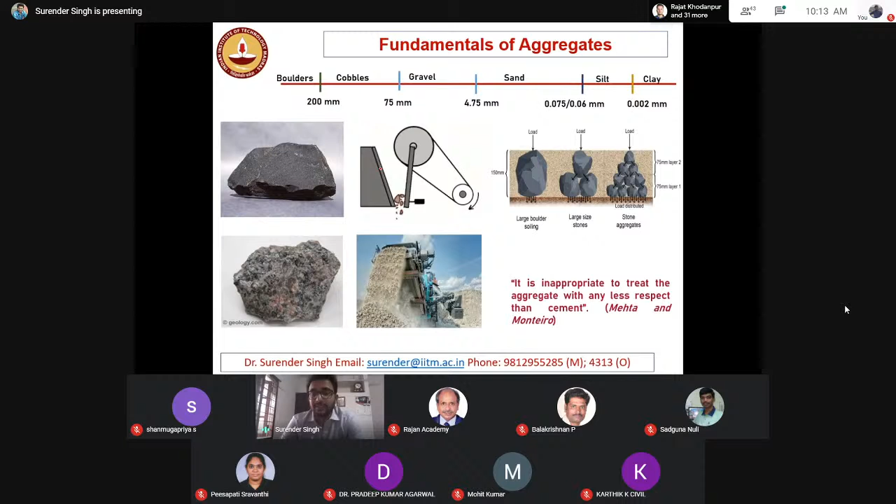In buildings we are using 60 to 80% of volume by aggregates. In pavements it can be much more, in fact around 90% also. Earlier we were getting aggregates for around 50 paisa, 60 paisa. But nowadays, because of the ban on quarrying activities, you can see in Chennai also that we are getting aggregates from far quarries, because there is a ban on quarrying activities.

We are not getting the coarse aggregate. And in fact, if I talk about the fine aggregates, they are very, very scarce now.

This increases the cost of the aggregates. So that's why we have to give equal respect to the aggregates. Also it will be affecting your pavement. Now it's monsoon in Chennai. When you are riding over the pavement and applying your brakes, it may lead to slipping or skidding, right? And mostly it is affected by the properties of the aggregates. Also the abrasion resistance is affected by the properties of the aggregates. And durability, because we are surrounded by the sea. If the aggregates are not durable, definitely your concrete structure will not be durable. So that's why I say we have to give equal respect to the aggregates as we are giving to cement.

So coming to the main part, that is fundamentals of aggregates. My way of teaching is little bit different. I'll be giving the challenges and then we'll be thinking, taking everything into practical aspect, not the theoretical aspect.

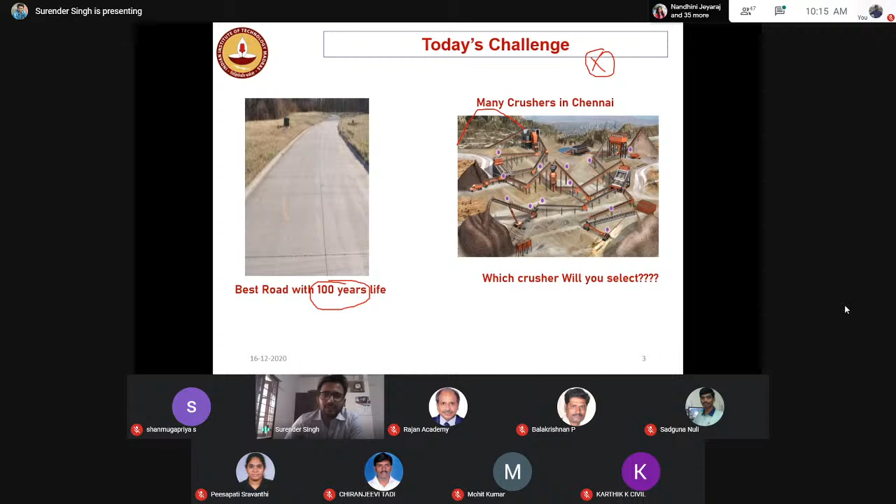So how do we select a quarry from which we can get good quality aggregates? Assume we have 5 quarrying plants in Chennai and one, say, in Cheyyar or Kanchipuram. Obviously we will not be taking the aggregates from Kanchipuram, right? Because transportation cost will be included and our pavement should also be economical.

So out of these 5 crushing plants - 1, 2, 3, 4, and 5 - which one do we need to select? Suppose Professor Rajan asks you: why don't you go to the crushing plant and characterize the aggregate, and tell me which aggregate will be beneficial for our concrete?

What will you do? Remember this picture in your mind and you have to go along with my presentation - you have to be involved in it. So the question is: which crusher do I have to select so that my pavement can stand for 100 years?

So obviously you will be going to the site, and Professor Rajan will be calling you: hey guys, what kind of aggregates are available there? What will you say? Before that we should know the classifications, fundamentals of classification.

Normally we can classify the aggregates into natural aggregates and artificial aggregates, which is a recent advancement. Earlier we know we have the igneous rock, sedimentary rock, and metamorphic rock. But in Chennai we are having igneous rock, mostly granite. In South India, most of the time we have granite aggregates. So you can call back and tell Professor Rajan: yeah, we are having igneous rock.

And nowadays we have artificial aggregates too - manufactured aggregate, recycled concrete aggregates, recycled asphalt aggregates, whatever - there are different types of aggregates. But then Professor Rajan will ask you: okay, now you told me there is a granite aggregate - which kind of granite aggregate? Can you classify it? As an engineer, how will you classify it?

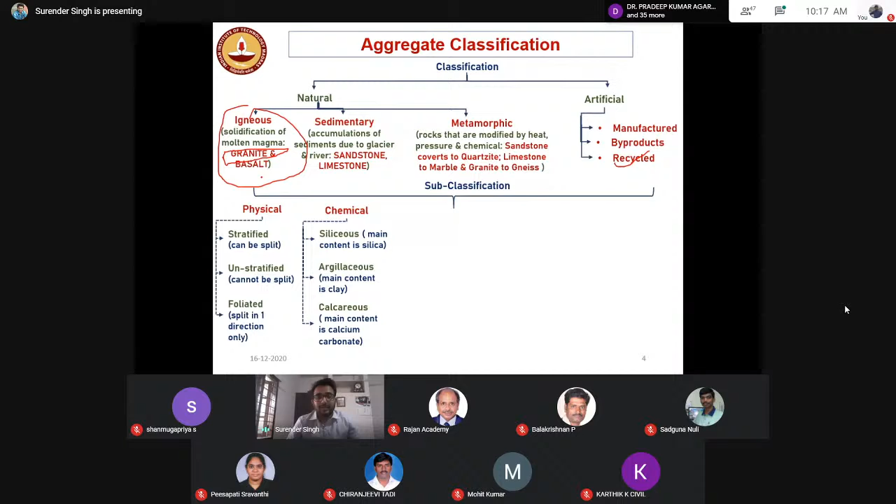We are classifying whether it's coarse aggregate or fine aggregate, but that's not the only criteria - there are many criteria. Based upon the physical properties, we can divide them, like when the aggregates can be split into two halves from one direction or both directions, we can classify. And then we can do some chemical characterization - we can say it is siliceous material, or made of clay, or sometimes you can get lime aggregate also. So we should know it.

And obviously, as a civil engineer, we always go with coarse aggregate or fine aggregate. But remember, coarse aggregate can further be divided into three parts based upon the size - cobble or boulders. Similarly, for fine aggregates, we can have the classifications there too.

In fact, we can have the silt, we can have the clay, right? Similarly, based upon the shape, we can further classify the aggregates into round aggregates, angular aggregates, subangular aggregates, flake and elongated aggregates. And also based upon the surface properties, you can feel the aggregates. You can see even if it is polished, you can say it's a polished aggregate.

Why are we reading about the classification? Because everything will be affecting the properties of the concrete. Let's say you are having a rough aggregate - obviously the bonding with the cement paste will be good. If you are having a polished aggregate, the bonding might not be good. But on the other hand, if you are getting a polished aggregate, the workability will be good, but not the properties. So what to do? How to decide? So before that, you should know the classification.

And the last classification is based upon where you are using it. For pavements, we are going with the normal weight concrete. The normal weight of the concrete is 2400 kg per meter cube. And if you are going for the big structures, heavy structures, you can get the heavy aggregates also. So in a nutshell, what I mean to say is that there could be many classifications that you should know.

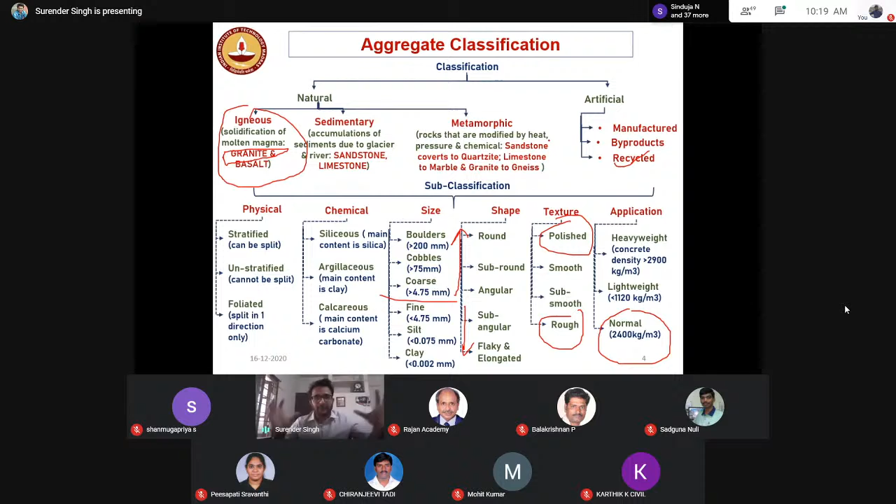Now the next question is, let's say you have decided 5 crushing plants. We saw it here, right? There are 5 crushing plants. Now your gang is going there, then you'll be going and collecting the aggregates for the characterization, right? So you might have done some test in your laboratory.

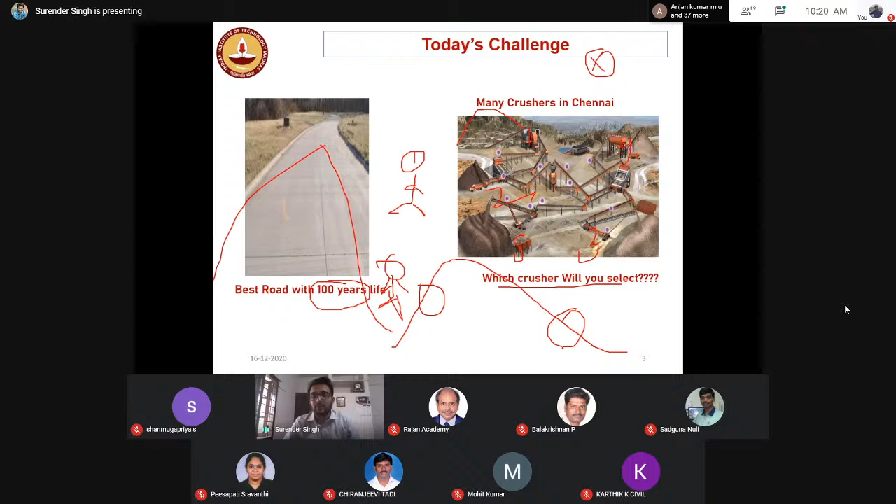What you are doing is taking 2 kg of the aggregate and then characterizing it, whether it's right or not. Because you can see here, there will be heaps - large heaps will be there in crushing plants. And you are taking the aggregates from here. And then can you say that the entire properties can be visualized with the help of a small sample? No. If you are taking the aggregates from here, one person will be saying this aggregate is good, but the person who is taking the aggregates from there will be saying no, the aggregates are not good.

So there is a sampling technique you should know. How to do the sampling? It depends upon the size of the aggregate. Normally we have 2 sizes - remember this, I have met with many students and they are always confused. There are 2 sizes: one is maximum size. Maximum size is the smallest sieve through which 100% of the aggregate will be passing.

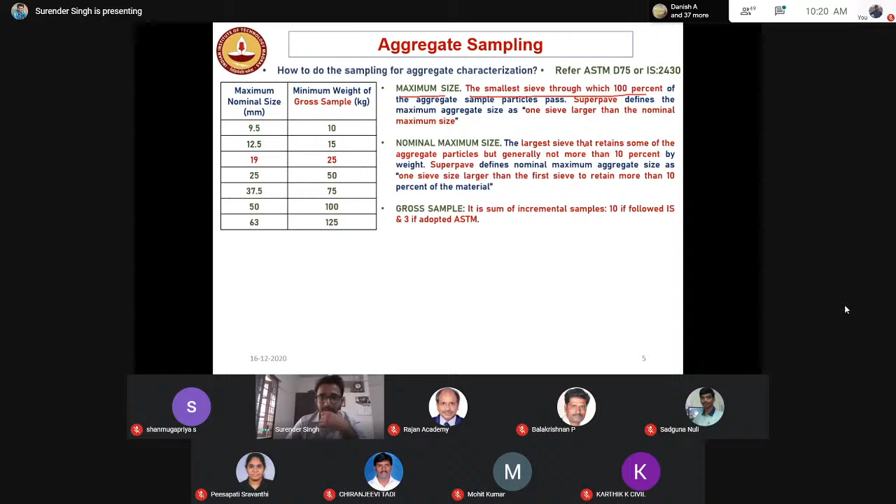And remember, there is a difference between the maximum size when you are collecting it for concrete pavement and for bituminous pavement. I'll be considering everything for concrete pavement. So it is the smallest sieve through which 100% of the aggregate will be passing. Let's say we have 37.5 size aggregate, 25 mm, 19 mm - you have to see from which size 100% of the aggregate will be passing. That will be the maximum size. And nominal size is the largest sieve on which around 10% of the aggregates will be retained.

So based upon that, we'll be deciding the nominal maximum size. And based upon the nominal maximum size, we have to decide how much of the aggregates we have to bring to the laboratory in order to characterize it. Let's say 19 mm aggregate, nominal size is there - so you will go to the crushing plant and see a heap, 19 mm size is there. So what you have to do is collect 25 kg of the aggregate. Remember, 25, not 2 kg - it's 25 kg.

Now the next question is from where you will be collecting the aggregates. You have to collect the aggregates from 10 different locations. Let's say this is the heap which is available - what you have to do is go with a board, a cardboard, and divide it into 3 parts: top third, mid, and bottom third. Then you have to place that cardboard inside the heap so that the upper aggregates will not be falling below.

So then collect the aggregates from here, similarly collect from here. Remember, you have to collect in 10 different increments. Place your cardboard here and then collect from here, collect from here, collect from here - how many? 6. Similarly 7, 8, and on the back side 9, 10, 11, 12, whatever - it should be minimum 10. And after that, what do you have to do?

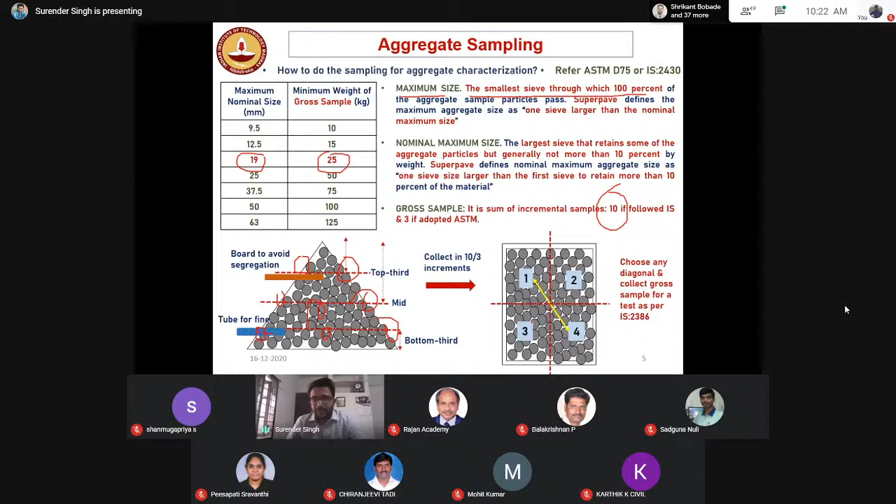You have to come to the lab and spread the aggregates in a container, then divide it into four parts and select any 2 diagonal quarters. Let me repeat: go to the site, collect 25 kg of aggregate when the nominal size is 19 mm, from 10 different locations, from top, third, mid and bottom. Then come to the lab, mix all the aggregates together, spread it, and divide into 4 quarters.

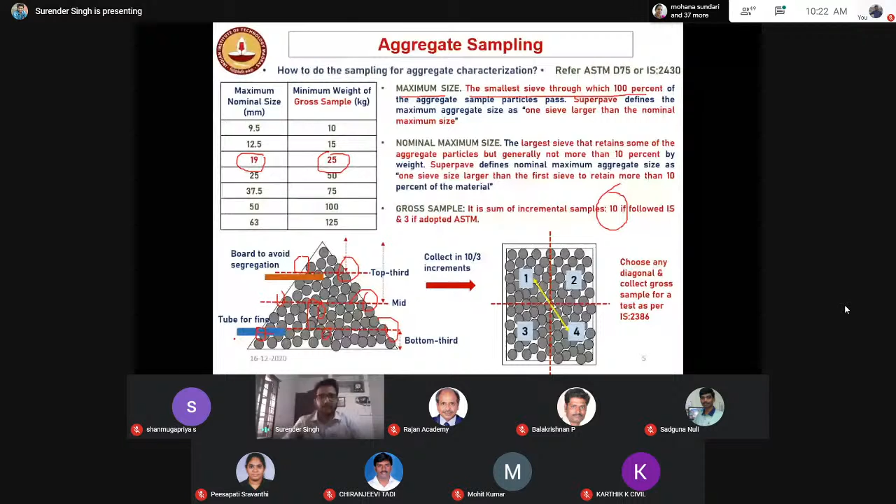Select any 2 diagonal quarters. If it is a fine aggregate, use a PVC pipe. Insert it and get the fine aggregates from different locations, then come to the lab and characterize your material.

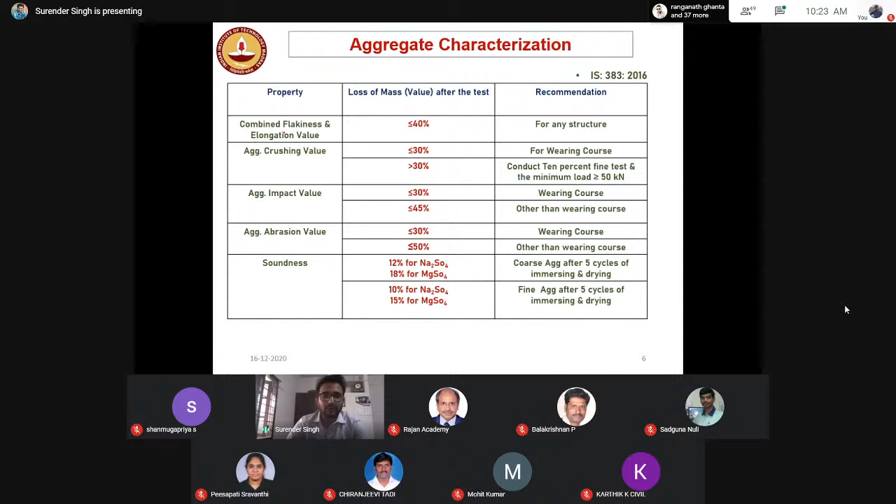For characterization, you will already be aware of the crushing value and impact value, so I will not be touching those. The last characterization I'll discuss is a recent one, which came about in the last 10 years.

You can see that the fraction passing 2 micrometer is clay, and we don't need clay for concrete. Although clay is used for cement manufacturing, when you are using aggregates for concrete production, it should not have clay, else it will affect the durability properties.

Nowadays, if you talk to some contractors, they'll mention crushed aggregate and uncrushed aggregate. Uncrushed aggregate means the gravels that you directly get from the sea or rivers, big boulders, without crushing them, just using them directly. In that case we call them uncrushed. If you crush it, it will be called crushed gravel. Partially crushed means a blending between crushed gravel and uncrushed gravel.

As far as the fine aggregate is concerned, when you're crushing the coarser aggregates, there will be some dust, and that dust is known as crushed stone sand or crushed gravel sand. If you mix it with natural sand, it will be named mixed sand. Nowadays we call it M sand. So M sand is nothing but the dust from the aggregates mixed with natural sand, known as mixed sand or M sand.

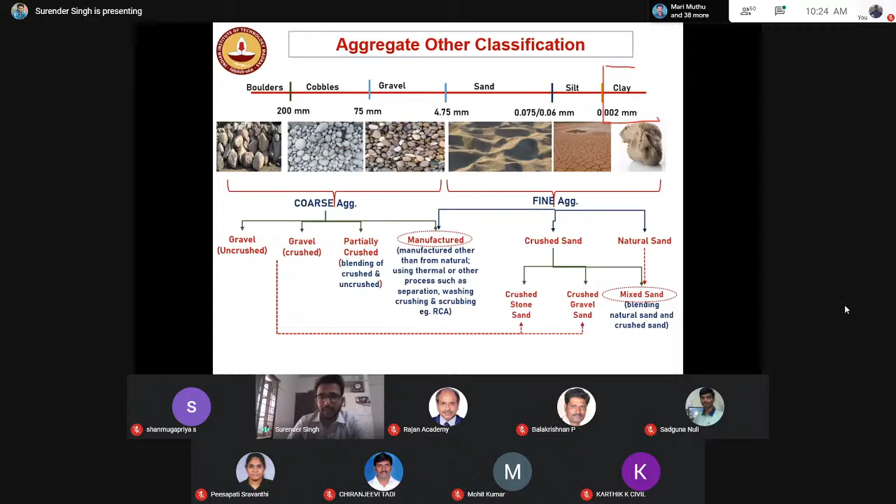Now, what happens when you go to the site? Professor Rajan asks you, what is the size of the aggregate? Normally it will be 20 mm, 40 mm, 63 mm, 16 mm, it can be various sizes. But remember, there are 2 gradations: one is single size aggregates, and the other is graded aggregates.

Let's take an example, say it's 20 mm. What do you mean by 20 mm? How do you know whether it is single size or graded? If you see single size, that doesn't mean all the aggregates are retained on 20 mm. This is a big confusion among students, that 20 mm means everything will be retained on 20 mm.

No. If I take 20 mm single size, you can see it passes completely from 40 mm, and it also passes from 20 mm, from 85% to 100%. That means only around 15% is retained. And on the 4.75 mm sieve also, it passes around 0 to 5%.

If I take the graded 20 mm aggregates, you can see it passes from 40 mm, may pass 20 mm, may pass 10 mm, and may pass 4.75 mm. So what is the difference? The difference is that this 20 mm graded aggregate has a significant amount of 10 mm aggregate also, and a significant amount of 4.75 mm aggregate also. Then why am I teaching this?

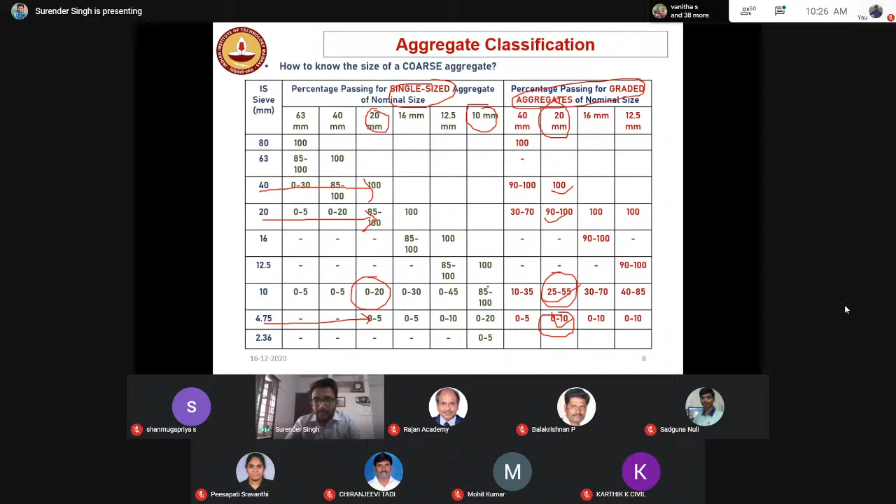Because in concrete we need graded aggregates. So if you go to the site and find 40 mm, 16 mm, 20 mm, 12.5 mm separately, you have to mix these aggregates to make a single graded aggregate size. When you go to the site and they say we are using 10 mm and 20 mm, that means most of the time it can be single size aggregate, and single size aggregate doesn't mean it is retained on 10 mm — it will be passing through 10 mm also.

As far as fine aggregates are concerned, if you go to the market or the crushing plants, you'll see there are different zones: zone 1, zone 2, zone 3, zone 4 fine aggregates. As per IS 383 specifications, you can classify which variety of sand is available.

Remember one thing here. In these respective codes, you will be seeing different kinds of fine aggregates. And when you are going to the site, there will be deviation. Not all the fine aggregates that you will be getting will be having its limits between specified limits. There will be marginal deviation. In that case, what to do?

The code, that is IS 383, we have recently revised it, allows you to do little bit things. But deviation should not be there in the 600 micrometer sieve. So if you find any fine aggregate and there is a 5% deviation in other sieves, you can go through it. You can say yeah, this is zone 1.

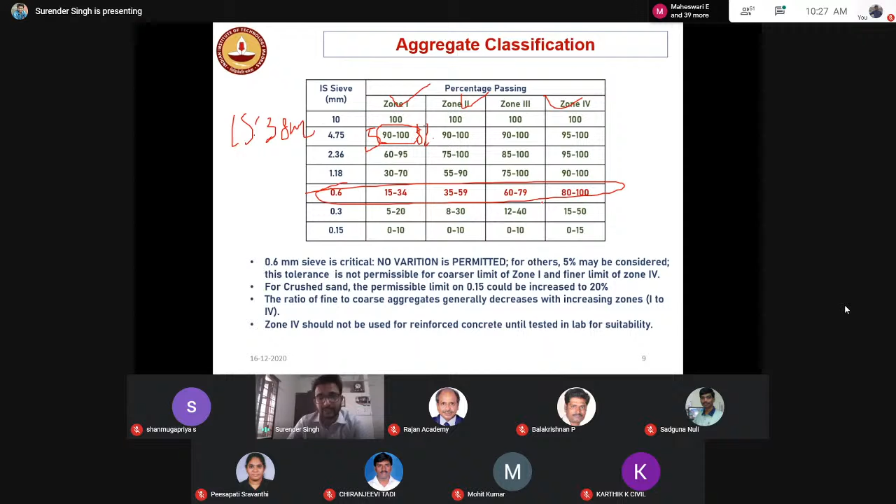So we have different characterization things. You might have seen in your college also, now because of the pandemic situation, everything is closed. But I assume that most of the students did the transportation laboratory. So we have to characterize the aggregate for specific gravity, density, toughness, strength, abrasion resistance, polishing value, elongation and flakiness value, and the durability aspects.

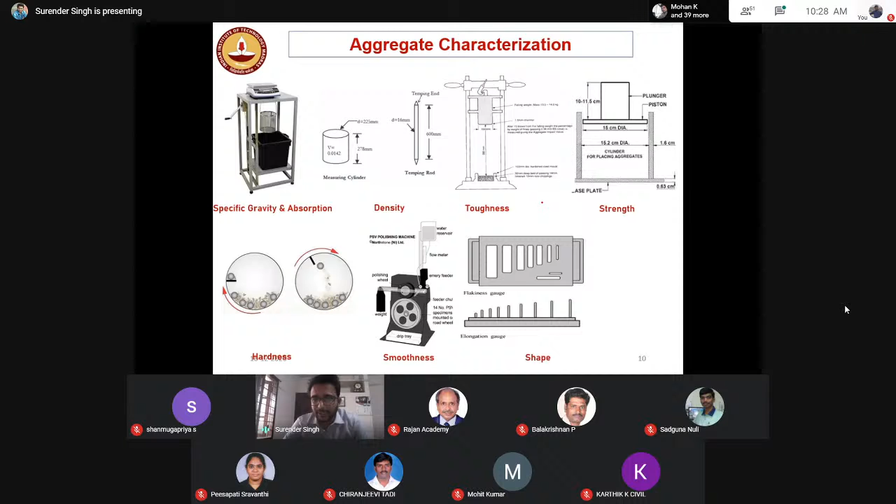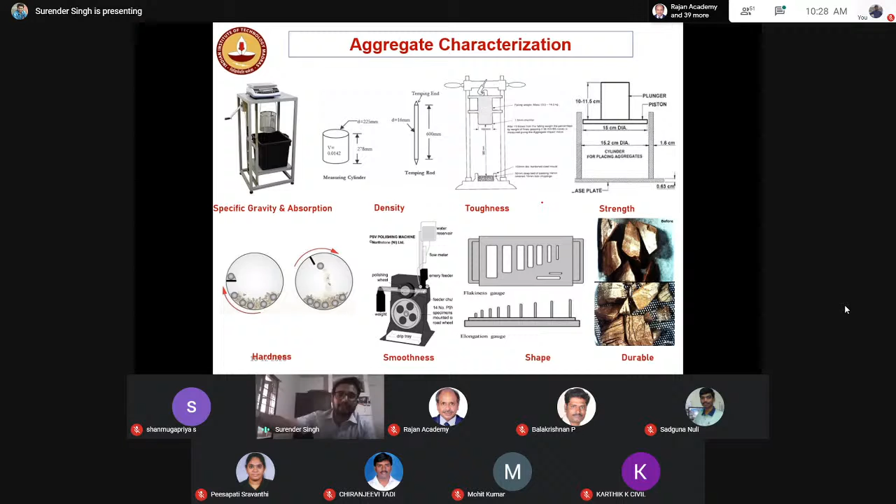And based upon all these properties, then you have to decide which crushing plant you have to select. The aggregate whose specific gravity is good, whose water absorption is lesser, whose density is more, whose toughness is more, strength is more, hardness will be more, then you can say yes, out of these 5 crushing plants, I'll be selecting this crushing plant. And then you can come to your professor and say, sir, out of these 5 crushing plants, we are selecting this one because the properties are good. What properties? What we have discussed.

And then remember, for pavement application, we have given different specifications. You can go through IS 2386 guidelines, and you can see whenever you want to use it for building or pavement application, the water absorption of the aggregate should be less than 2%, impact value should be less than 30%, crushing value should be less than 30%, abrasion should be 30%.

So based upon these properties, let's say what happened, 2 of the crushers were giving good properties. Now which crusher do you need to select? Then it will be depending upon the economy, how far it is from our site. In today's example, our site is connecting JAIN college to IIT Madras. Whichever crusher plant is very near, we have to select that.

Now you will be discussing, see, my mountain is same, from the same mountain they are crushing the aggregates, giving me 20 mm and 10 mm. This crusher plant also, and similarly this crusher plant also, is using the same mountain for producing 20 mm and 10 mm. So why are the aggregate properties changing? You must be thinking it, right?

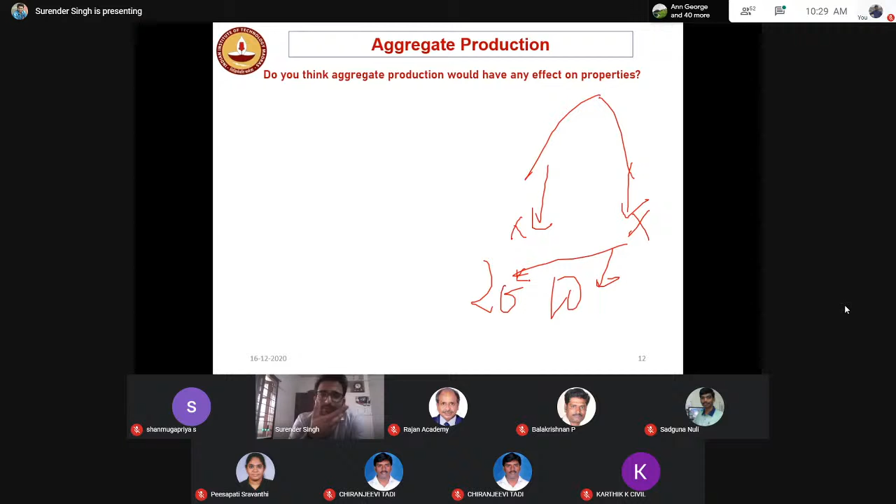Yes, because the aggregate production is having a significant effect. Normally what happens, you will go to the mountain, you will demolish the mountain, right? You will be getting big boulders. Then you will be bringing those big boulders, or maybe you are crushing the big boulders at the site also. And then you will bring it to your crushing plant, and you will be again crushing it.

So you can have various crushing mechanisms: primary crushing, secondary crushing, tertiary crushing, or quaternary crushing, in which you are reducing the size. Let's say this was 100 mm, you keep on crushing it, and you got an aggregate of 4.75 mm. So now do you think that the crushing will be having an effect on the properties of the concrete?

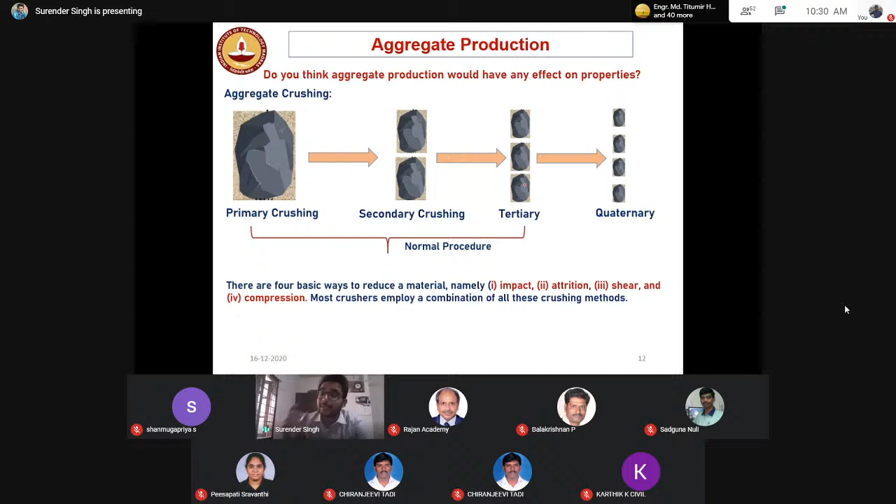So normally we are having 3 mechanisms. We'll be crushing first, then again crushing it, and again crushing it. And the crushers that you are using will be having some effect. So at the site, we have different crushers: a jaw crusher, a cone crusher, and an impact crusher. So all these crushers we are using in order to produce aggregates, and there is a significant effect also.

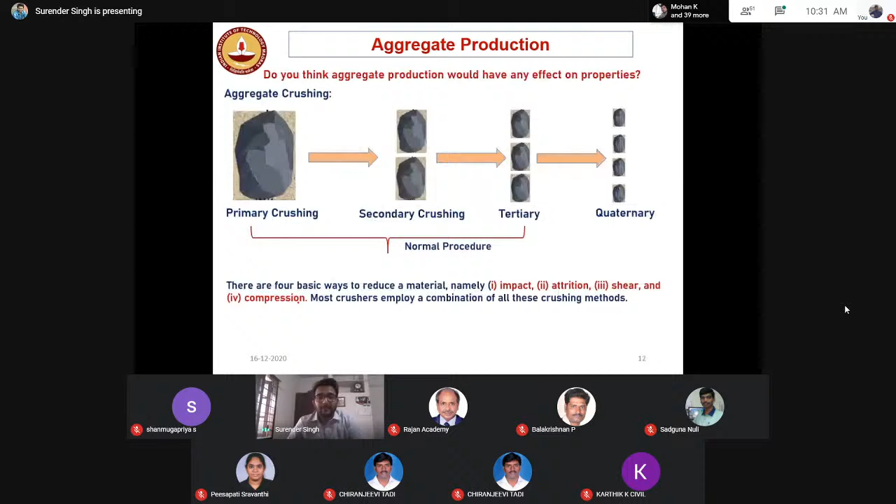Earlier we were not thinking about this, we were thinking okay, we are just crushing the aggregates, right? But now the mechanism, the principle that you are applying to crush the aggregates will be having a significant effect on the properties of the aggregates. We have many studies, and what we found is that by changing the sequence, let's say you are having first jaw crusher, then impact crusher, then cone crusher, or you can have first jaw crusher, cone crusher, and impact crusher.

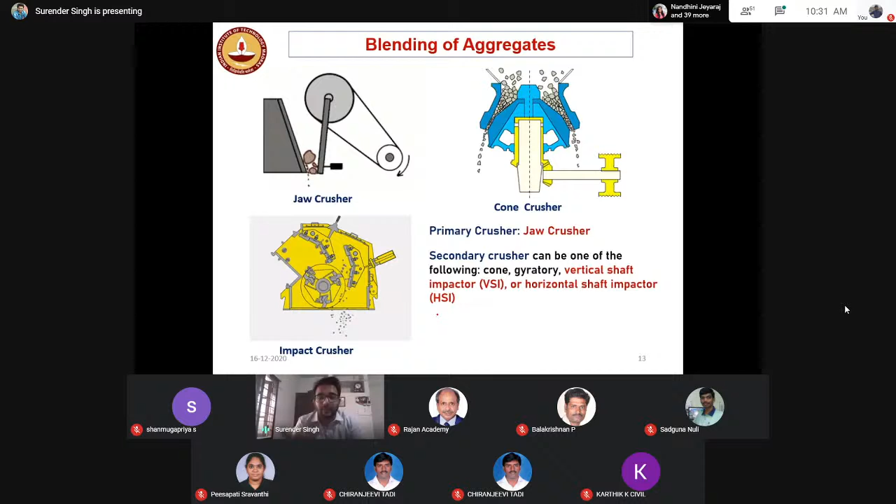Impact crusher can be of different varieties. By changing the mechanisms, you can get different aggregate properties, which will be beneficial. As a researcher, what you have to do is crush the aggregate with different mechanisms and see which aggregate gives you good properties. If you want to do some research, your master's or PhD, or even a good BTech project, you can take this one. You can go to the crushing plants, see what mechanisms they are using, document it, bring the aggregates, do the characterization, make concrete, find the strength, and you will see there is a difference.

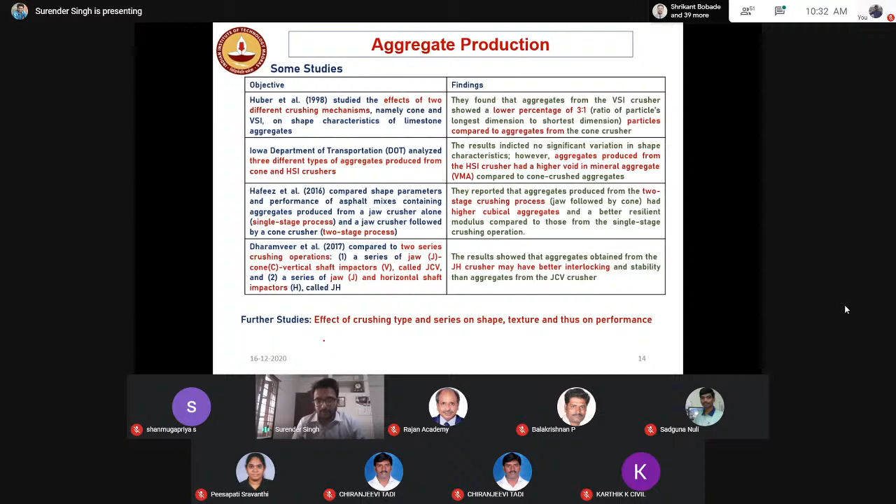Now the next question is, you must be thinking, for buildings you're always using 20 mm and 10 mm aggregates, right? And for the pavements, you are using 31.5 mm size aggregate. Why is there a difference?

The difference is that in our pavements we have different layers. We have the wearing course, we have the base course, we have the drainage layer which we can call the granular sub-base course, and we have the subgrade.

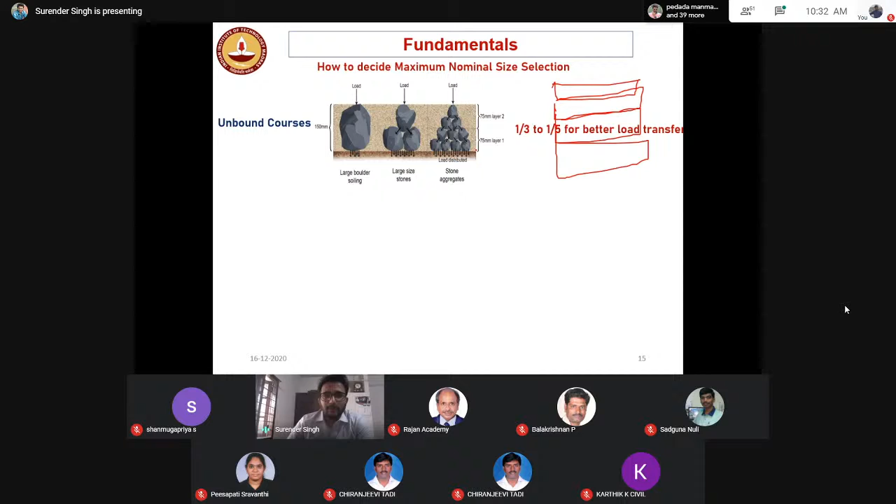So how to decide what should be the size of the aggregate? You know the formula, stress equals load upon area, right? Which shows that if you increase the area, the stresses will be reducing. So how to increase the area? Let's take an example. Let's say you are taking one aggregate of 150 mm size, applying the load. You can see here the area of load application is this, and the same area is there. So the stresses occurring at the top, the stresses at the bottom will also be the same.

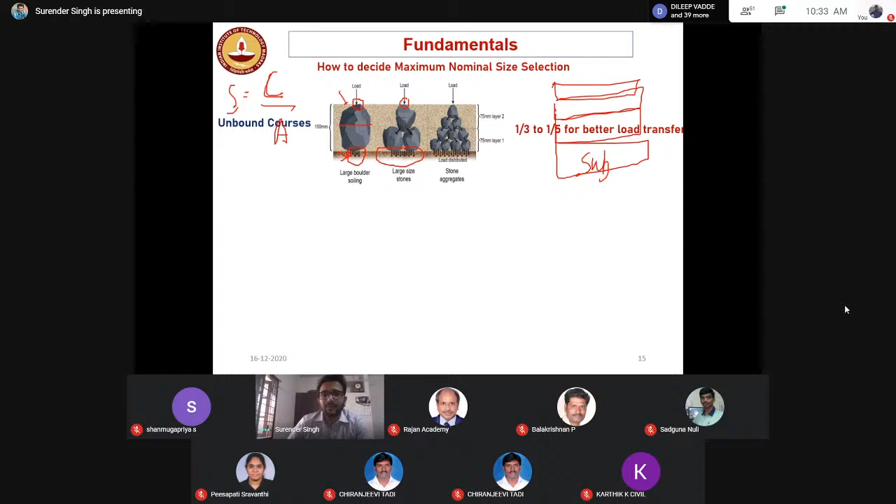And we know in subgrade what we are using is soil, mostly soil, and it is the weakest link in a pavement system. You have to protect the subgrade. So in the next step, what we can do, we can crush this aggregate into 3 aggregates. Now what will happen if you apply the loading at this area, but the load distribution will be there from a bigger area? That means the stresses will be reducing. Similarly, if you further crush this aggregate into small pieces, the area will further increase, and if the area is increasing, the stresses on the subgrade, which is the weakest link, are reducing.

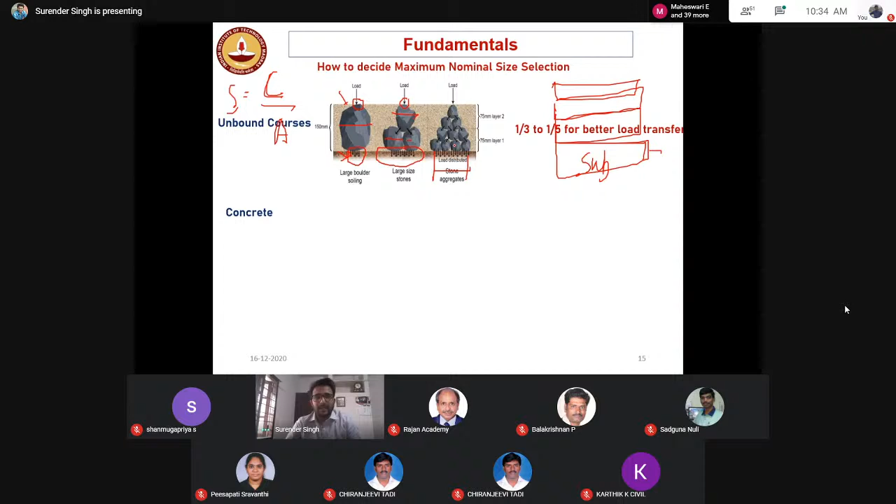So in a nutshell, as a thumb rule, how to decide the aggregate size: you know your subgrade will be around 500 mm, so 500 divided by 3 or divided by 5, this should be your aggregate size for aggregate-to-aggregate transfer. In case of concrete, generally there is a mixed feeling, there are 2 schools of thought.

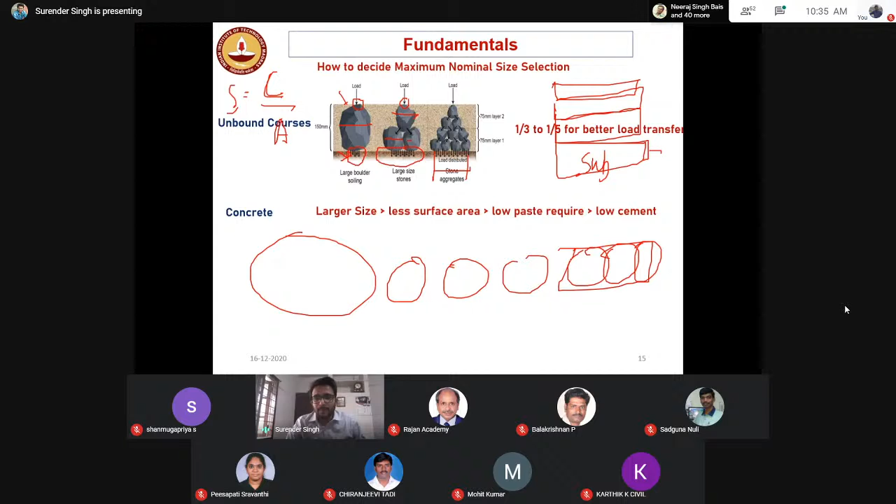One says that if you have a bigger aggregate, the surface area will be lesser, and if you crush the aggregate into pieces, the surface area will be higher. If the surface area is higher, you will be needing more cement, and cement is the most expensive portion. So my thing is, I have to construct one pavement that will last 100 years, but it should be economical also. So what I'm doing, I'll be using a bigger size aggregate so that the surface area will be lesser, and if the surface area is lesser, when I make the pavement, I'll be needing lesser cement to bind the aggregates, and it becomes economical.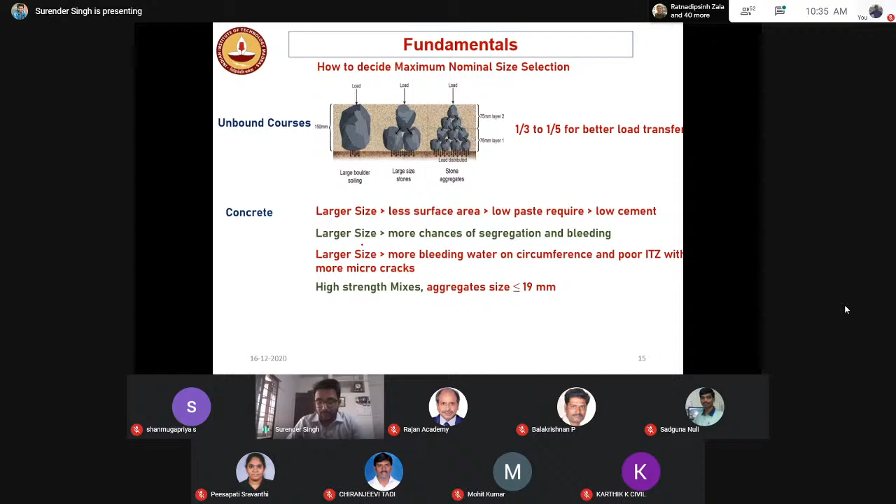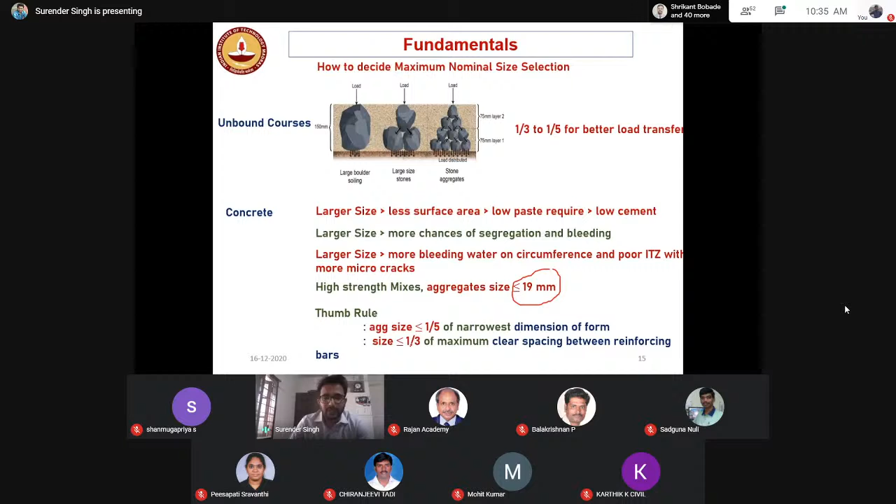However, there is another school of thought also. It says that if you have large size aggregate, then mixing will be a problem. If you have large size, your properties will be lesser because aggregate-to-aggregate interlocking will not be there. So we say that if you want to make very good concrete, don't increase the size beyond 19 mm. If you're going with normal concrete, you can use the same formula: the maximum size of the aggregate should be 1/5 of the total thickness of the pavement. So if your slab is 300 mm, divided by 5, you get 60. So the size of the aggregate should not be more than 60. This way you can get the strength as well as good mixing.

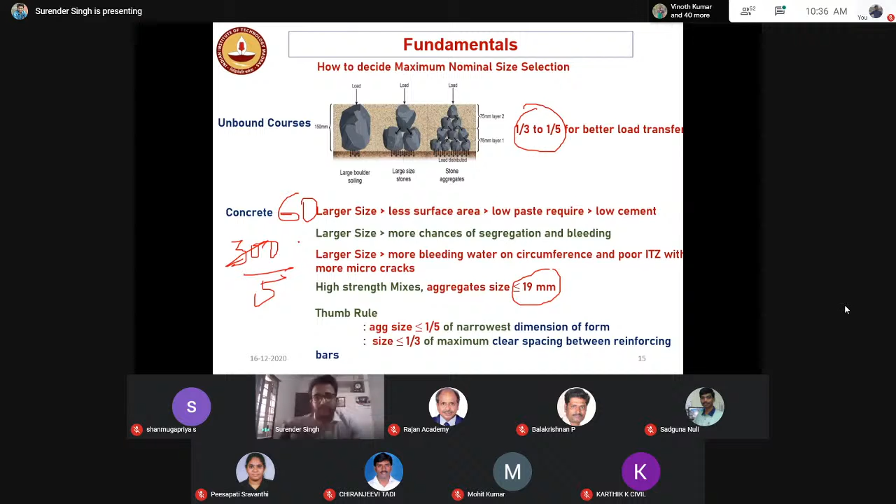So now the question is, why do we have to mix 2 aggregates together.

If you remember from slide 4 or 5, we told you that when you go to the crusher plant, you will be getting different heaps: 20 mm aggregate heap, 16 mm heap, 12.5 mm heap. We have to club everything together to make a graded aggregate.

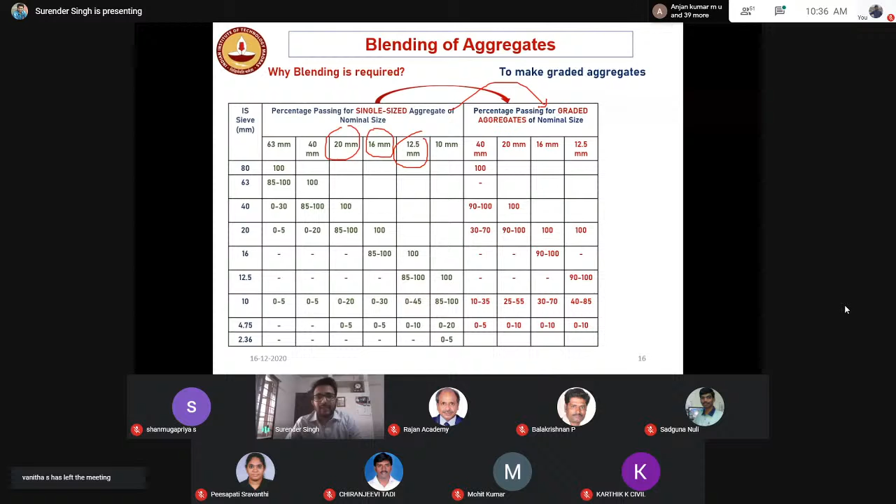Similarly, if I talk about concrete pavements, we have different layers: embankment, subgrade, GSB, DLC, and the slab. If you read the Indian Roads Congress specification, it says the aggregates we use should be a combination of 26.5 mm, 4.75 mm, 300 micrometer, and 75 micrometer.

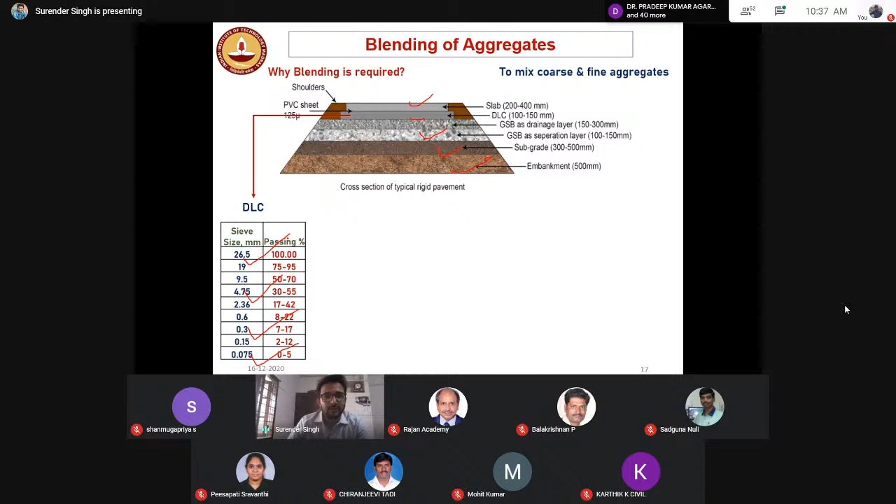Remember, there are two reasons: one, you have to mix different coarse aggregates together to make a graded aggregate, and then mix fine aggregates along with the coarse aggregate to achieve the gradation specified within the stipulated limits of MORTH or Indian Roads Congress. For different layers we have different gradations.

Then the question is, why do we have to grade the aggregates? Let's take an example. Take 26.5 mm aggregate, or any size, and fill a container, completely packed. Then pour some water - let's say 100 ml of water was required to fill these voids.

Then you add 9.5 mm aggregate into this mixture. This smaller aggregate will fill the voids. So if the voids are filled by smaller size aggregate, you will need a lesser quantity of water to fill those voids. Then do one more thing.

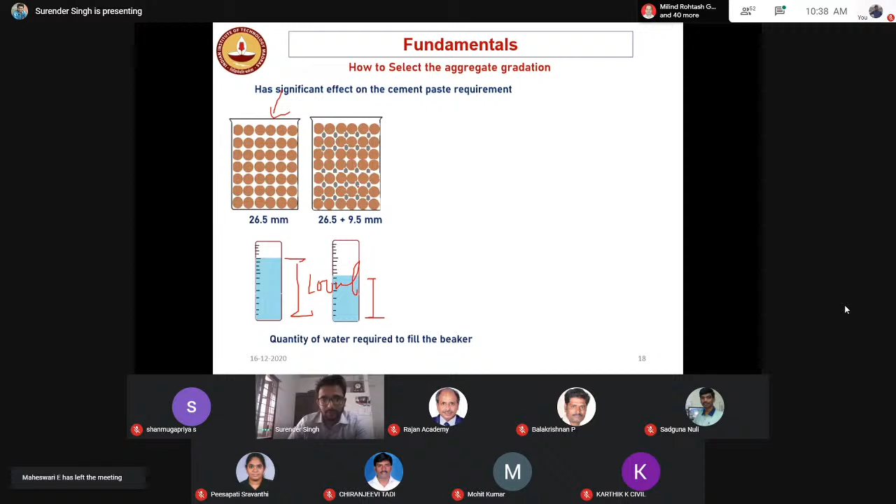You add 4.75 mm aggregate to it. So the big size aggregates were there, having some voids; those voids were filled by smaller size aggregate, and that smaller aggregate also had voids which were filled by 4.75 mm aggregate. Thus you need significantly lesser amount of water to fill these voids.

One second, some noise is coming. Yeah, sorry for the interruption.

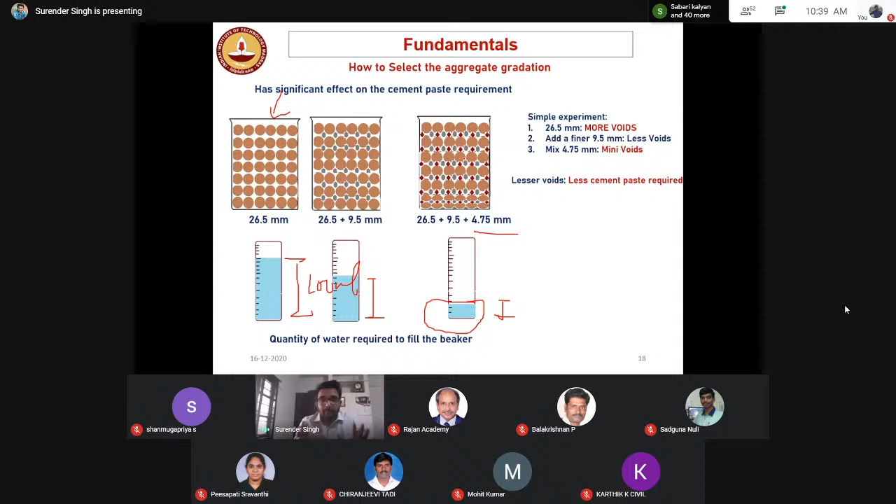So what we need to see is that if the amount of voids is lesser, that means lesser cement is required, and if lesser cement is required, your concrete will be better and economical. Generally we have seen that if you mix coarse and fine aggregate in a proportion of 60 and 40%, your voids will be least. You can take this as a thumb rule, but it's not always the same.

When you ask an engineer, they will say 60% coarse aggregate and 40% fine aggregate. But it's not always the same - it can be 35-65%, or 50-50 also. So you have to find the proportion so that the voids will be minimum.

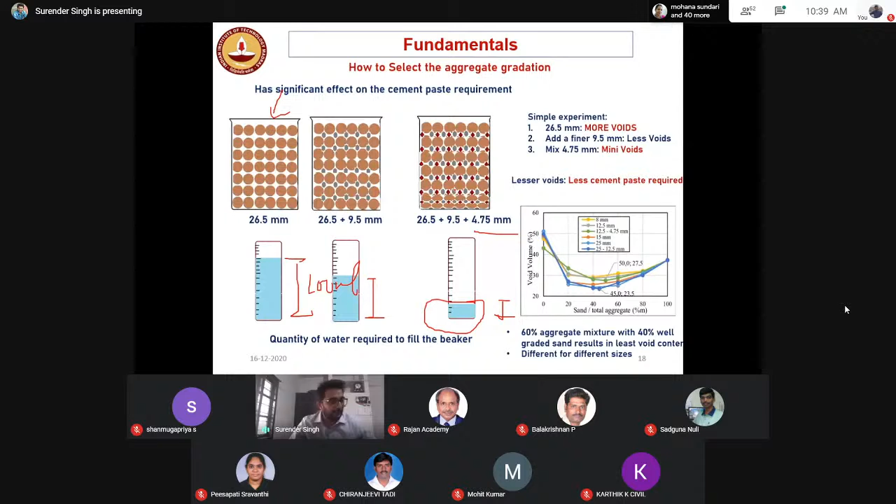So, why, when we are mixing the aggregates... I hope you can hear me, right? Professor Rajan, can you hear me? Sir, we can hear you. Yeah, thank you. Sir, very much audible, please continue. Okay, thank you very much.

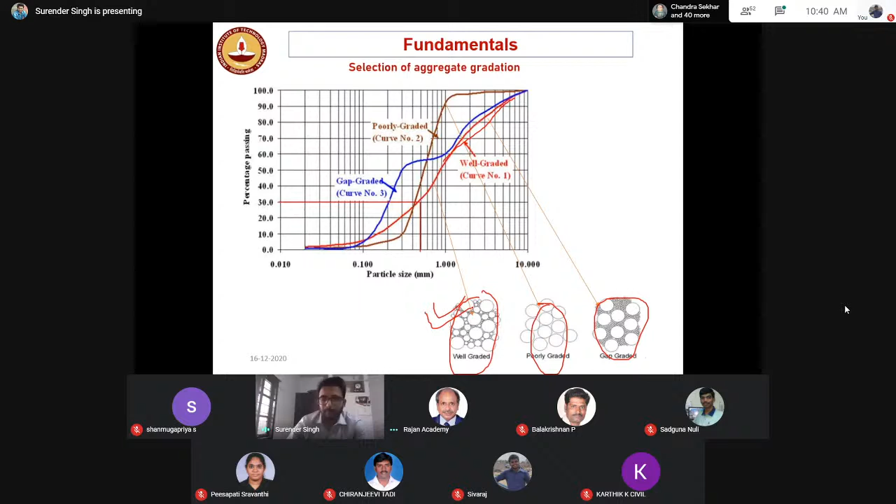So when we are mixing the aggregates, we can have different gradations: well-graded aggregates, poorly graded aggregates, gap-graded aggregates. What we always need is well-graded aggregates, because if you have well-graded aggregates, there will be lesser voids and the cement requirement will be lesser.

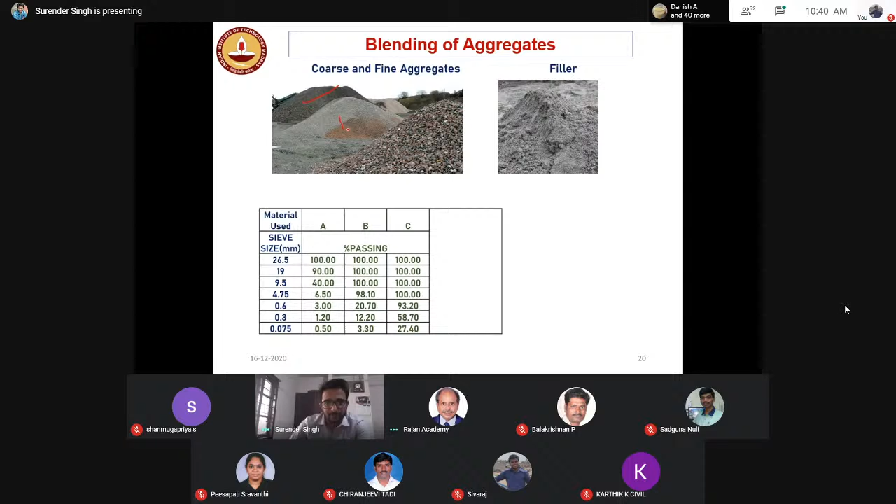Let's take an example. Suppose Professor Rajan sent you to the site, you will see different heaps. This is a picture I took from a crushing plant in Chennai - we can see 20 mm aggregate, 10 mm aggregate, 40 mm aggregate, and filler material. How do we mix all these aggregates together? This is the question.

Let's say we have three aggregates: 20 mm, 10 mm, and some fine aggregates. How to mix them together? You have to open your IRC, Indian Roads Congress specification, and it will specify the limits - for example, from the 75 micrometer sieve, 5 to 10% of the material should be passing.

Okay, how to mix these aggregates to fall within the limits? This is the question, so we have different methods. I'll be teaching you all the methods because you are civil engineers, and you will be going to the site where your boss will ask you to blend these aggregates together. You'll be thinking how to blend them. The simple way is the hit and trial method.

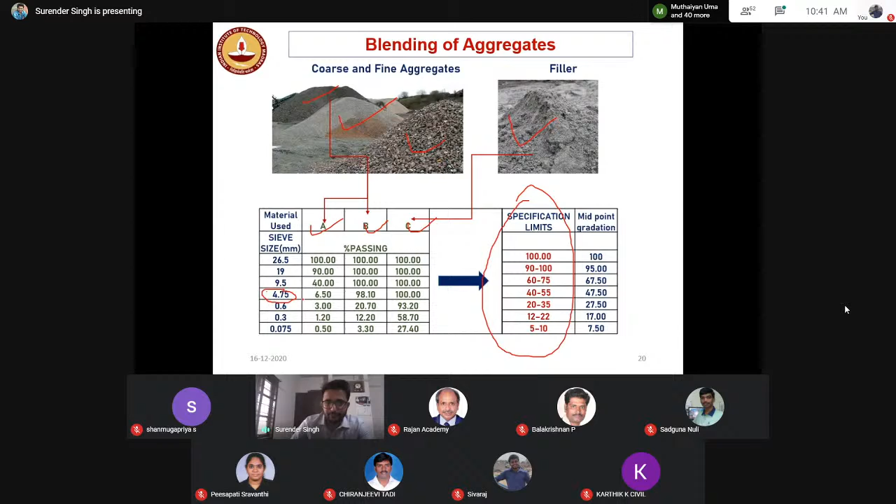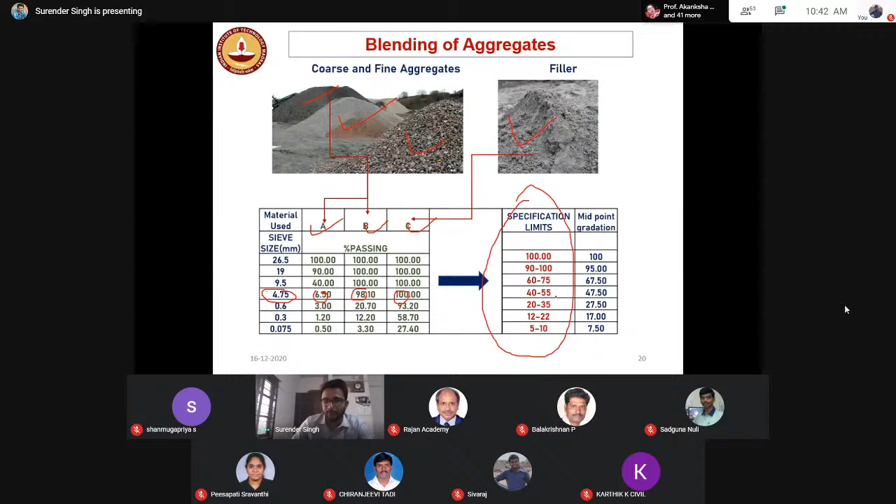Let's say this is the specification. I'm taking only one sieve, 4.75mm. Material A, 6% is passing; material B, 100% is passing; material C, again 100% is passing. Your specification says that when you mix the three aggregates together, 40 to 55% of the aggregate should be passing. Then how to do it?

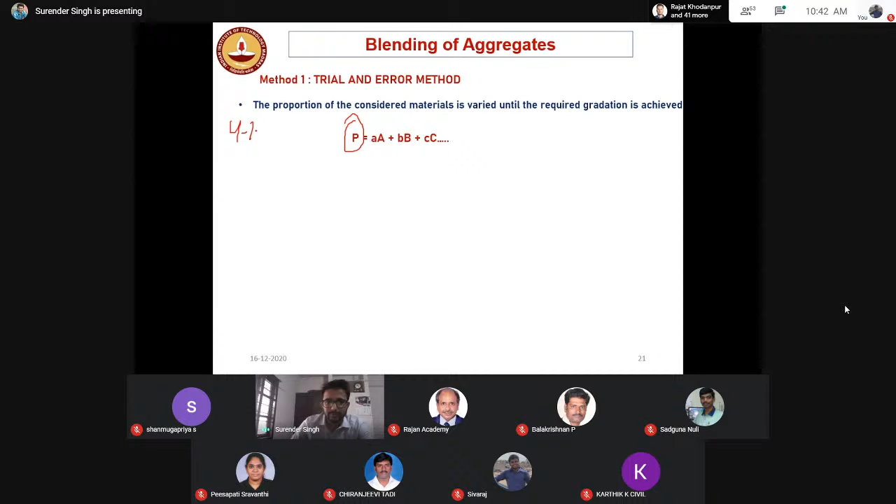We can go with the hit and trial method. The specification says that from the 4.75mm sieve, 40 to 55% should be passing. We can take the mid value, let's say 50%. You have three materials, A, B, and C. You multiply A by some proportion, B by some proportion, and C by some proportion — let's say 0.3, 0.3, and 0.4. In total that's 0.4, so 30% A, 30% B, and 40% C. When you combine all this material together, you get 50%. You'll be wondering how this person came up with these values, because there is a principle behind it.

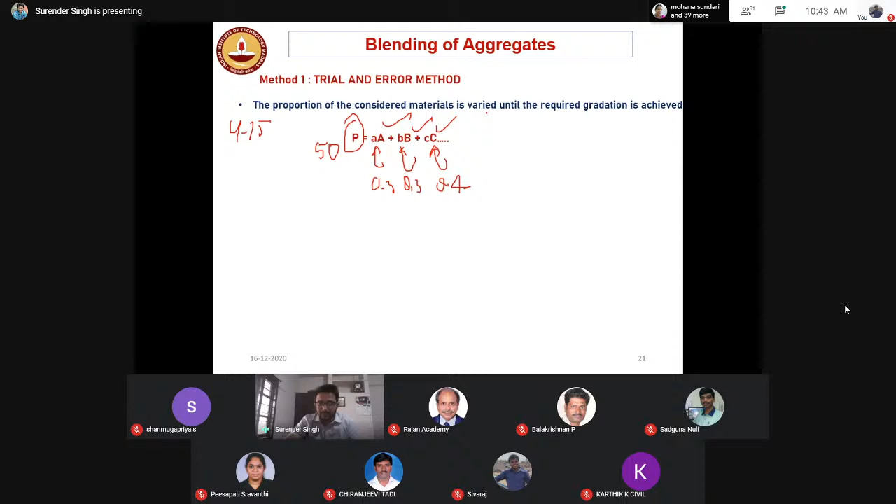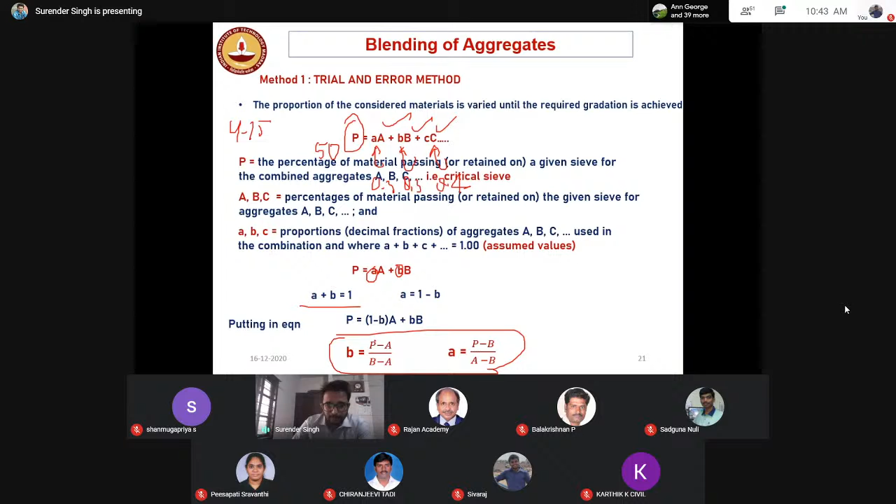Let's take only A and B material. You have to mix A material in some proportion and B material in some proportion to get the specification. So A plus B should equal 100%, or 1. Then A equals 1 minus B. So we come out with formulas: we mix B material in this proportion, and we mix A material in this proportion.

So 2.36 is your critical sieve. The formula is B equals P minus A, divided by B minus A. P is your specification, which is 42.5. A is material A's value, 3.2. B is material B's value, 82. Plugging in these values, B equals 0.5. Since A plus B equals 1, A equals 1 minus 0.5, which is also 0.5.

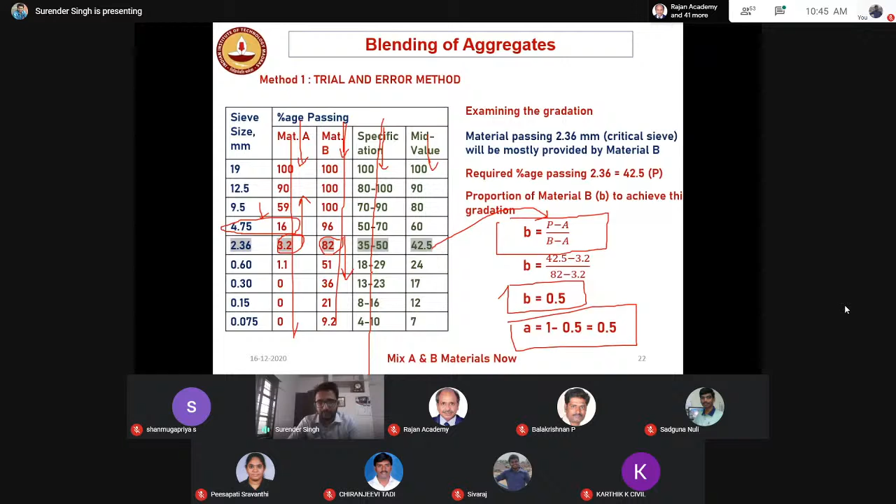The next step is to check whether, taking 50% of A and 50% of B, we get gradation within the specification limits. You multiply all the material A values by 50, all the material B values by 50, and add them together. Check whether the limit of 80 to 100 is met — we got 95, so yes, it falls within. The limit for the next sieve says 50 to 70, and our value is 56 — yes, that's correct too.

My limit says 18 to 29, it is 25.6, it is between. My limit says 4 to 10, it is 4.6. That means the proportion that you have decided is well enough.

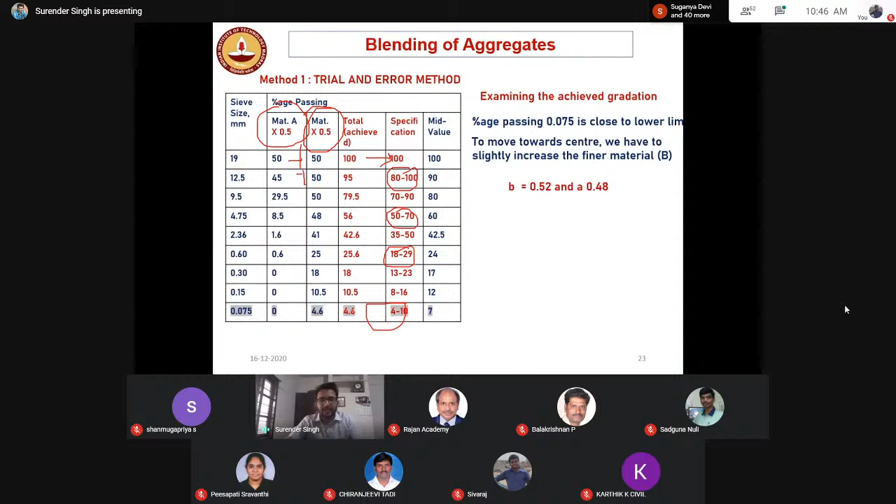If you have, let's say, 3 aggregates, you can use the same formula. You have to first decide the critical sieve, but working with the 3 formulas is always a little bit tricky. So I'll be asking you, why don't you go to your computer and make an Excel program.

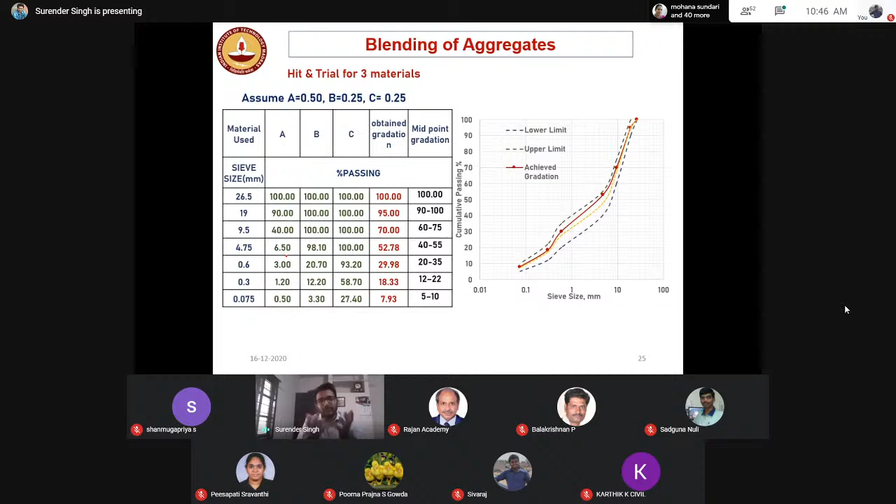But if you don't have the Excel program, you can go with the triangulation chart method. This method is generally used for three sieves, when you have 3 aggregates, aggregate A, aggregate B, and aggregate C. It is one of the best methods.

Every aggregate we can divide into 3 parts. Let's say this is my triangle. You have to construct one triangle, and it should be an equilateral triangle. Every material will be having 3 things.

One, coarse aggregate. Coarse aggregate means more than 4.75. Then fine aggregate, which means 4.75 to 75 micrometer, and C less than 75 micrometer. So every aggregate you have to divide into 3 components: more than 4.75 is called coarse aggregate, 4.75 to 75 micrometer is called fine aggregate, and less than 75 micrometer is called filler material.

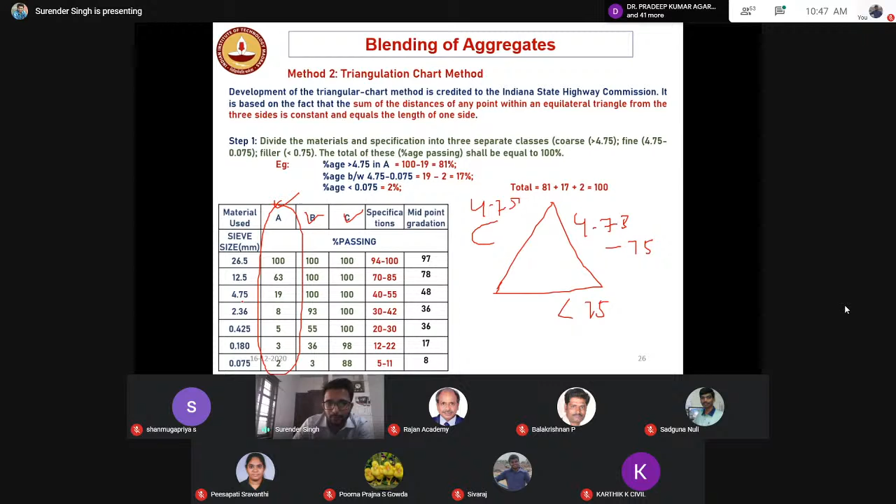So we'll take material A. In A, how much is the 4.75? Remember, this is percentage passing. So how much is retaining of 4.75? You have to simply subtract it from 100. So in material A, how much is more than 4.75? It shows 19% passes, so how much will be retaining? 100 minus 19 will be 81.

Then how much is between 4.75 to 75 micrometer? 19% is passing from 4.75, and 2% is passing through 75 micrometer. So how much is being retained? 19 minus 2 is 17%. This material is giving 17% fine aggregate. And how much filler is it giving? 2%.

Similarly, take material B. How much quantity is the coarse aggregate? 0, because there is no material retaining on 4.75, 100% is passing. How much is the fine aggregate? Fine aggregate is 4.75 to 75. You see, 3% is passing, so that's 97%.

In 1 hour we have to finish most of the thing, but I'm trying to finish most of the things so that when you go to your house and read it, I'm writing everything so that it will be beneficial to you. I'll be sharing this presentation with Professor Rajan.

Similarly, you have to do for material C also, and then similarly for specifications also. For specifications, you have to see how much coarse aggregate will be required: 100 minus 48 is 52. How much fine aggregate is it saying? 48 minus 8 gives 40%. And how much filler material should be required? 100 minus that, 8% is passing, so that means 8% filler material it is giving.

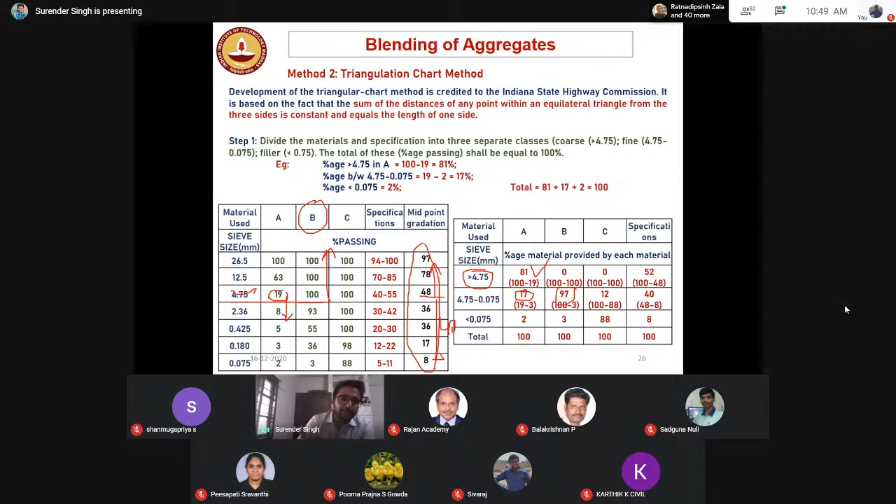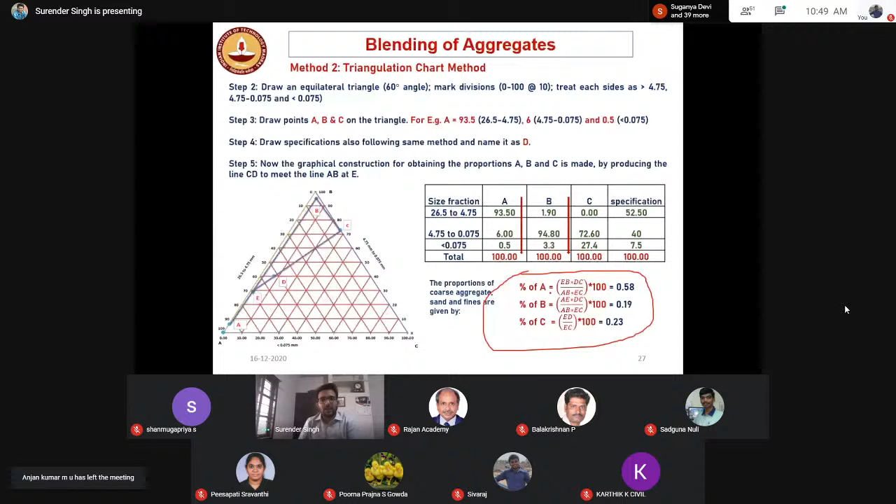Then you have to construct one triangle, with points A, B, and C, and then use this formula to get the proportion of different materials that you have to use. Simply, we have to blend 3 aggregates together so as to meet the specifications, and we are finding out how much quantity needs to be mixed.

There is one more method, a very, very famous method. If you know the Pradhan Mantri Gram Sadak Yojana, Professor Praveen Kumar's model is mostly followed for it. He was my supervisor, and he was always using this method, called the Rothfuchs method. He says this method is one of the best when you have to mix any quantity of aggregate.

What you have to do is use the blending curves for material A, material B, and material C. You just draw the curves, with size on one axis and percentage passing on the other. After that, you make it straight. Because the curve is like this, you make it straight by drawing one line. But since somebody will draw this line one way and somebody might draw it another way, when you are drawing this line, you have to see the area on both sides.

This area on this side and this area should be minimum. When you have the minimum straight line, that line will be better. Similarly, draw one straight line for material B, draw one straight line for material C. This is your specification line. So when you're drawing this line, you take the lower end, connect it to the upper end of material B. Similarly, lower end of material B, connect it to upper end of material C. So obviously it will be passing your specification limits, or we can say diagonal line. Then you have to draw one more line, and this is your material A, this is your material B, and this is your material C.

I'll repeat. What you have to do, you have to draw your curves, draw one diagonal line connecting 0 to 100%, and then you make it straight. It's a very simple formula. Then you have to connect these lines again, bottom to top. And wherever it is crossing the diagonal line, you have to again draw some more lines connecting on the percentage passing, and then this proportion will be A, this proportion will be B, and this proportion will be C. It's a simple formula, you can do it.

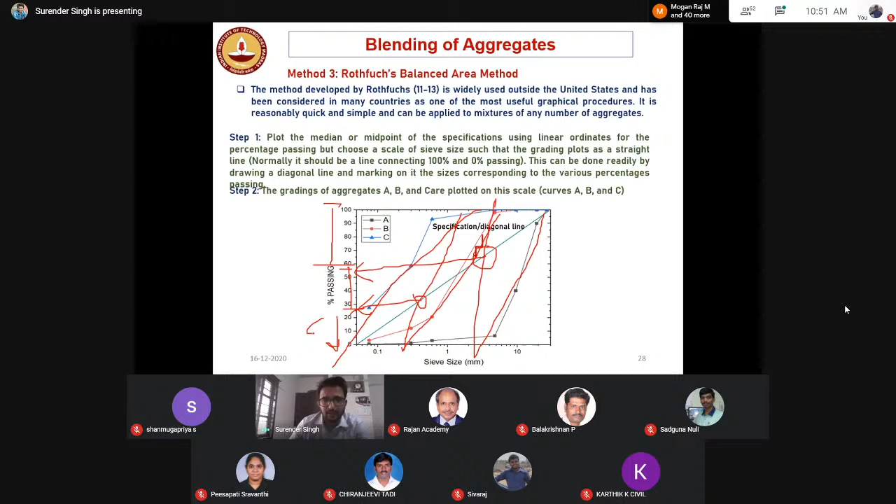Now the question that will be coming is that this professor is saying specification, specification, specification. From where are we getting all this specification? I am saying IRC, Indian Roads Congress, or Ministry of Road Transport and Highways, that is MORTH. But how to decide? And nowadays we know we don't have the aggregates, we have to use some recycled aggregate that we'll be discussing at 11:30. How to decide we can use the recycled aggregate, from where I should get the specification limits for recycled aggregate, and how to ensure that if I'm keeping my aggregate gradation within the specification limit, whether it will be giving me good results on site or not. How to decide?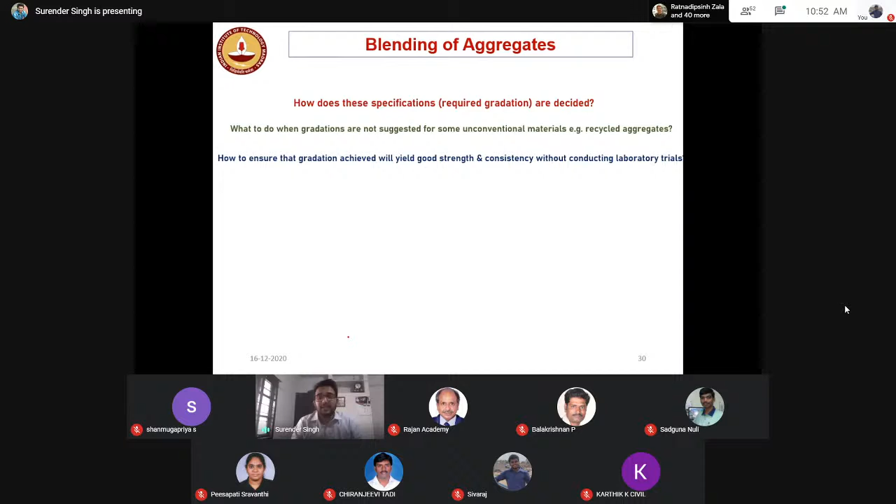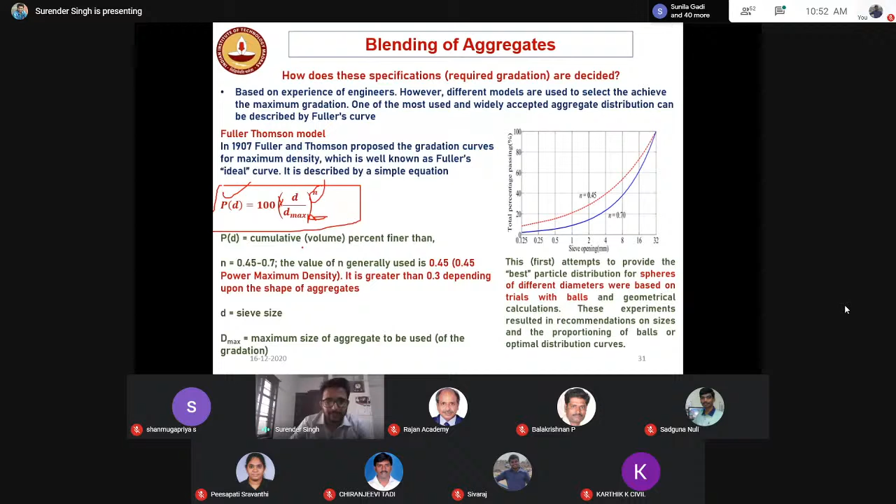For that we have some formulas. Normally what is happening, we are using Fuller and Thomson model. The simplest model is there: percentage passing is equal to 100 into bracket D upon D max, ki power N. D max is your nominal size of the aggregate and D is your size of the aggregate. N is your shape factor, you can keep it as 0.45 and then keep on doing.

Let's take an example. You went to the site, crusher plant, you found different aggregates: 19 mm aggregate, 12.5 mm aggregate, 9.5 mm aggregate, 75 micrometer. Then you have to see how much proportion, if I mix all these aggregates together, then I'll be getting a really well graded aggregate. Use this formula. How to use? First decide what is D max, that is maximum size. Maximum size is 19 mm, right?

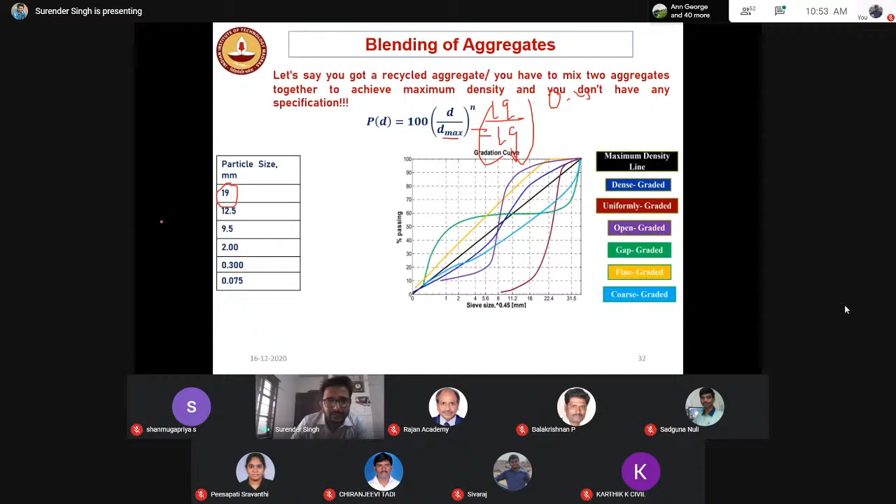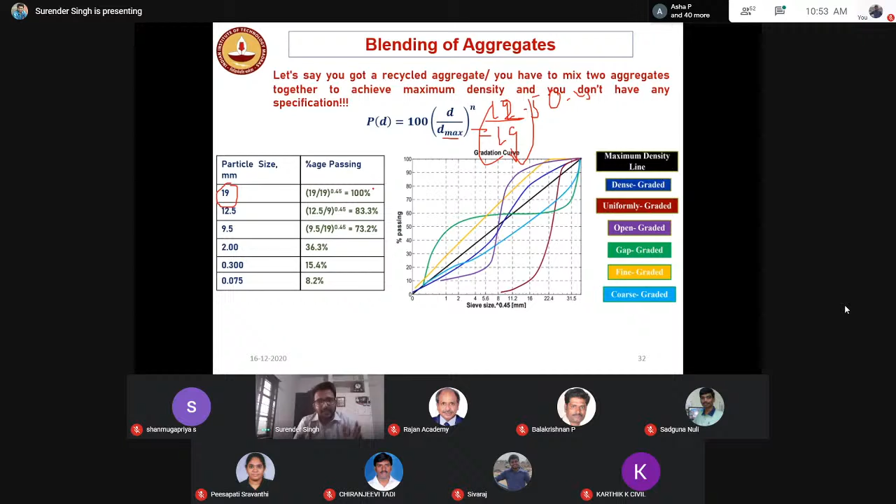Put 19 mm here. What is D? D is in 19, again 19 mm. So 19 divided by 19 ki power 0.45, you will be getting your results. Similarly for 12.5, you just simply put here 12.5 and use the same formula, you will be getting the values. You can see here, this shows that if you use this formula, you will be getting the recommendation limits. And if you are using this formula, I'll be guaranteeing you that you will be getting a relatively well graded aggregate gradation. Now the question is that we need two things from our concrete.

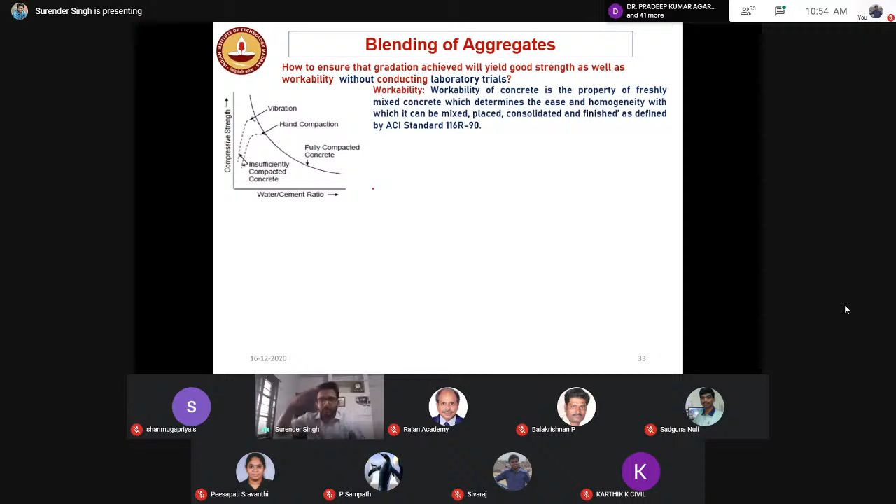One is workability and the other one is strength. Now you're the student of civil engineering, you know the workability. Workability means how much it is flowing, right? You'll be saying, but no, it's not like that. Workability means how well we can play with our concrete. For buildings you need more flowable concrete. For pavements we don't need more flowable concrete, right?

We need a thixotropy. Thixotropy means it's a property: when you are placing your concrete, it can stand, it should not be flowing, it should be standing. But when you are vibrating it, it should flow. And again, when you are removing the forces, it should again stand. That kind of property will be required for concrete pavement.

Remember, if somebody is asking you whether the concrete that you are using for buildings and the concrete you are using for pavements are the same or not, you should say no. Because in buildings we need workability, in pavements we need a property named thixotropy. Thixotropy means when you are placing your concrete it should be there, when you are vibrating it, it should flow, but again if you are removing the forces, it should again stand. Because in concrete pavements, we are removing the formwork just after placing, we are not waiting for 24 hours if you are going with slip form pavement.

So how to make that material? That material, we have to play with the aggregates only. You have to play with the aggregates only.

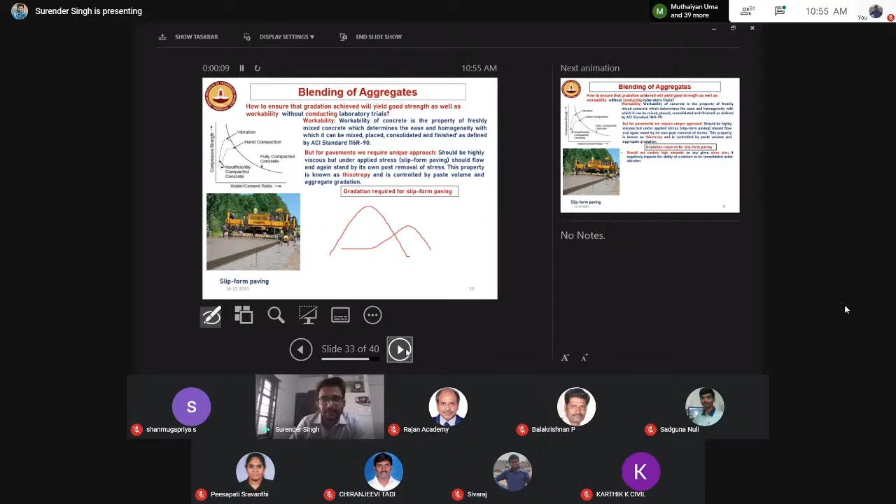In my pavement, the fine aggregates play a very important role. You'll be saying fine aggregate is 4.75, but no, we have two types: coarse fine aggregate and fine aggregate. Fine aggregate means from 4.75 to 2.36, and from 2.36 to 75 micrometer. These are the two sizes of fine aggregate: this is coarse fine, this is fine.

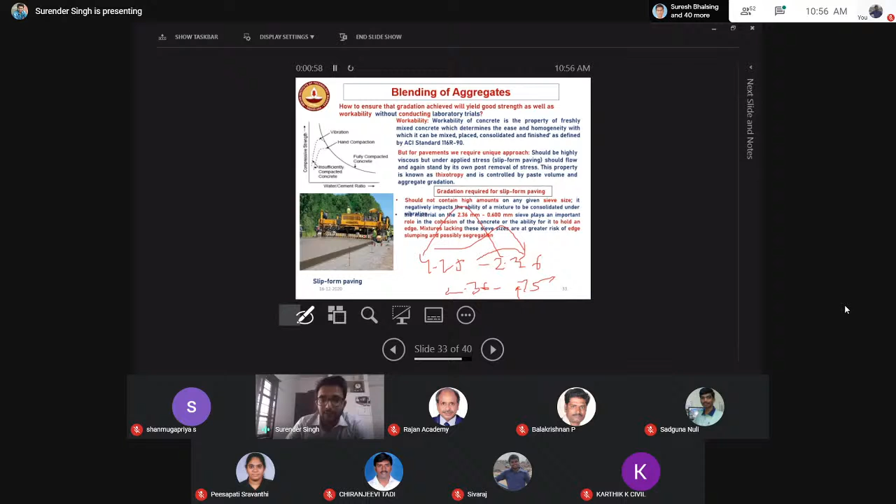So the finer aggregates will play an important role in achieving the thixotropy. It should be having a significant amount, not more, not less.

So now the question is, let's say you are sitting in the laboratory, obviously you'll not be going to the field, right? How to ensure that the aggregates you are blending together will give you good workability and good strength at the field? Now it's a pandemic situation, and we have to construct one pavement that should stand for 100 years. Without doing laboratory trials or field trials, how do we ensure it?

We have some models. Maybe what you can do is, I'll be sharing my presentation, and you can just go through it. But briefly, I'll explain.

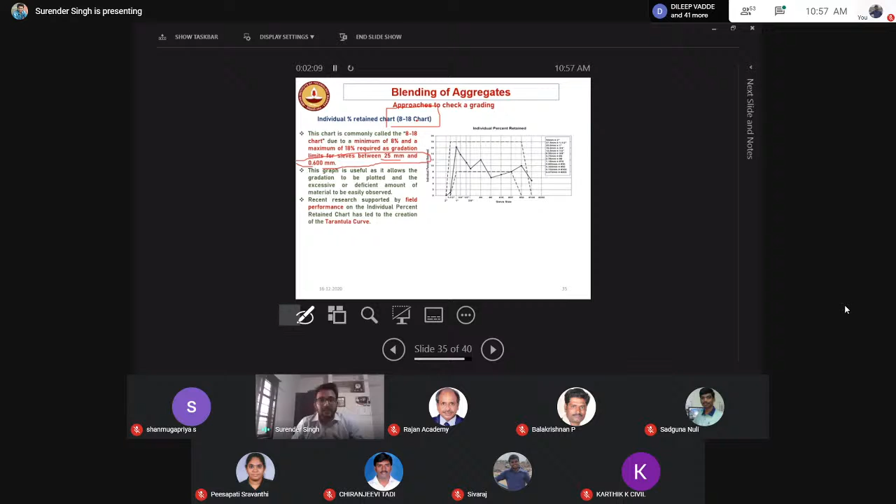We have one model we named the 8 to 18% model. This means you should ensure that your aggregates between 25 mm to 600 micrometer have at least 8% of the fraction and a maximum of 18%, because if you have more aggregates, workability will be an issue, and if you have lower aggregates, you will not get strength.

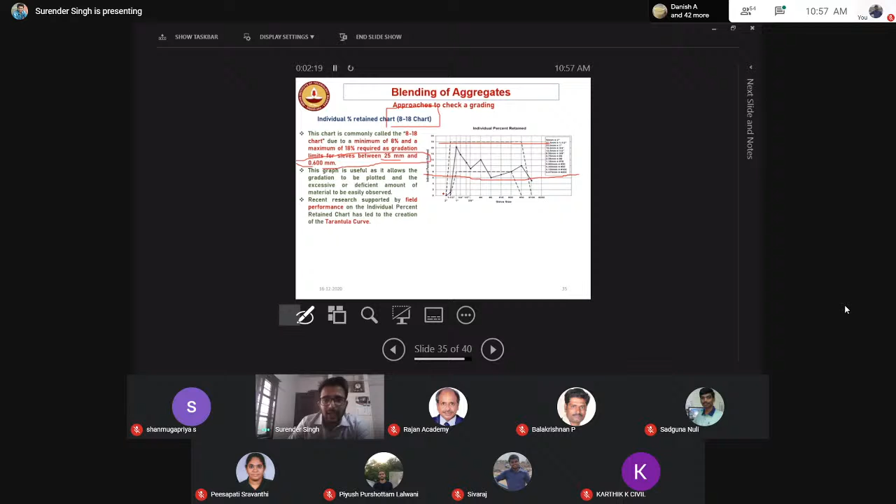So you have to draw one chart with two lines, the 18% line and the 8% line, whatever the specification, and then plot your curve. This curve should fall in between these two lines.

We have another model that recently got very famous. In Texas, US, they made 500 different mixtures with different gradations and different sources, constructed different pavements, and saw what the gradation should be. They found that the percentage between 2.36 to 600 micrometer should be greater than 15%, and fine sand, from 600 micrometer to 75 micrometer, should be between 24% to 34%.

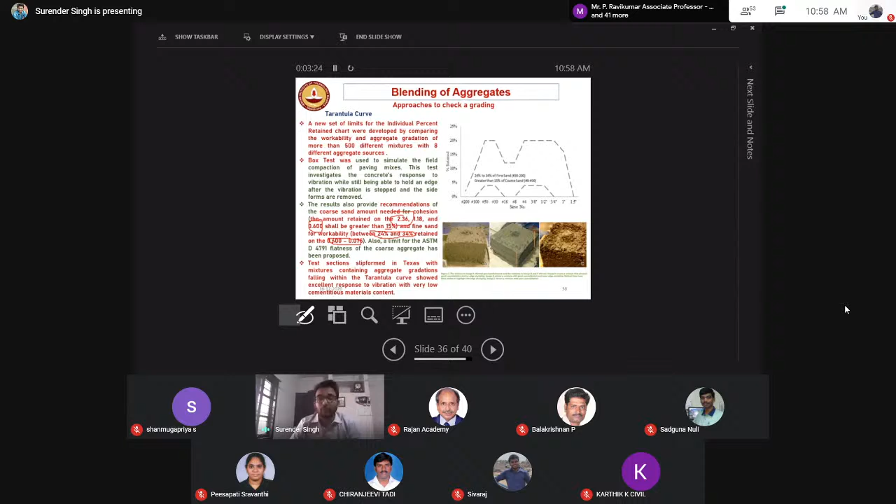If you make sure that whatever aggregate blending you are doing has 15% between 2.36 to 600 micrometer, and 24 to 34% between 600 micrometer to 75 micrometer, that means your concrete will be good. It will give you good properties, and now you can check it.

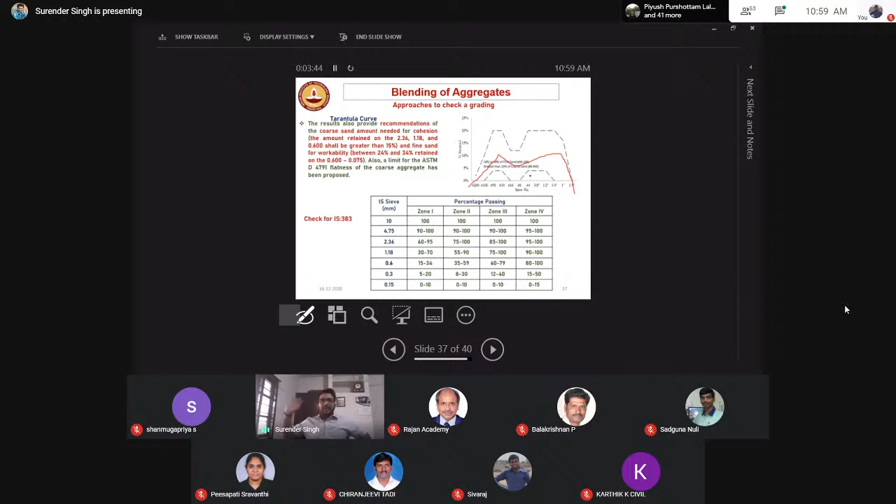So I wrote it down. What you can do is, at your home, you can mix different aggregates together and see whether it falls within this curve or not. If it is falling within this curve, you can sit and relax. You can say with confidence that if you're following my gradation, you'll be getting good workability.

So recently we updated one thing: we came out with a coarseness factor chart, which says it's not only about workability. When you take the aggregates together, you'll also be mixing cement in it, and cement is one of the influential factors affecting workability and strength. So why should we not include the cement? This is the question, so we came out with some models: coarseness factor and workability factor.

The gradation you are using can be divided into two parts, at 9.5 and 2.36. And the cement you'll be using gives you these factors, which you plot in this coarseness factor chart. When you combine the gradation and the quantity of cement, the relation between workability factor and coarseness factor should be as close to Zone II. If it is there, then they guarantee that your pavement will perform very, very well.

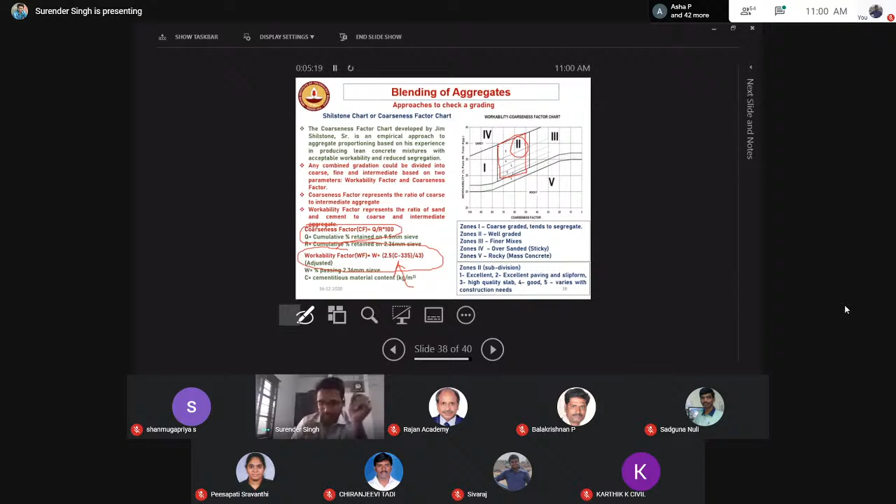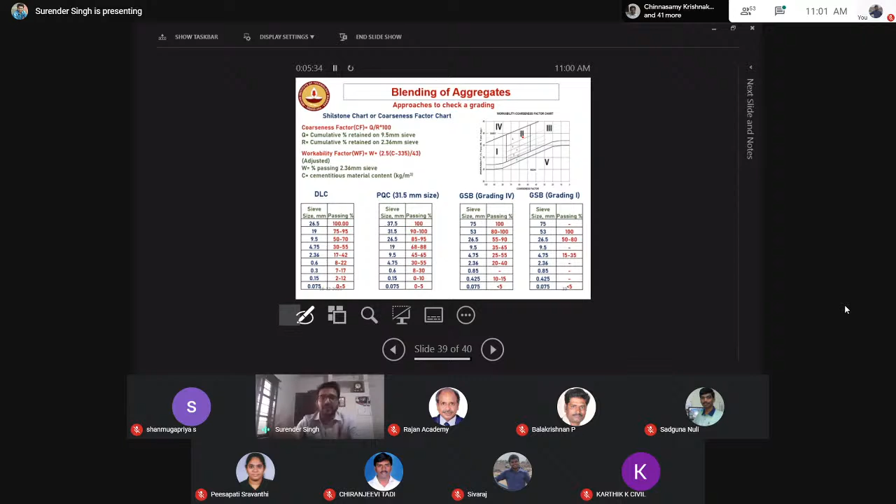So in a nutshell, what I can say in today's presentation is we discussed how to mix the aggregates together. Normally we don't give enough respect to mixing, but you have to. And how to make sure that without doing laboratory trials, without going to the site, we can mix the aggregates together so that the concrete pavement we are producing will be good enough. What you can do is go to the house, check the gradations given by IRC 58, or whatever IRCs, to see whether they're giving you good properties or not. Without constructing the pavement, you can check with the help of these formulas. So this was my last slide.